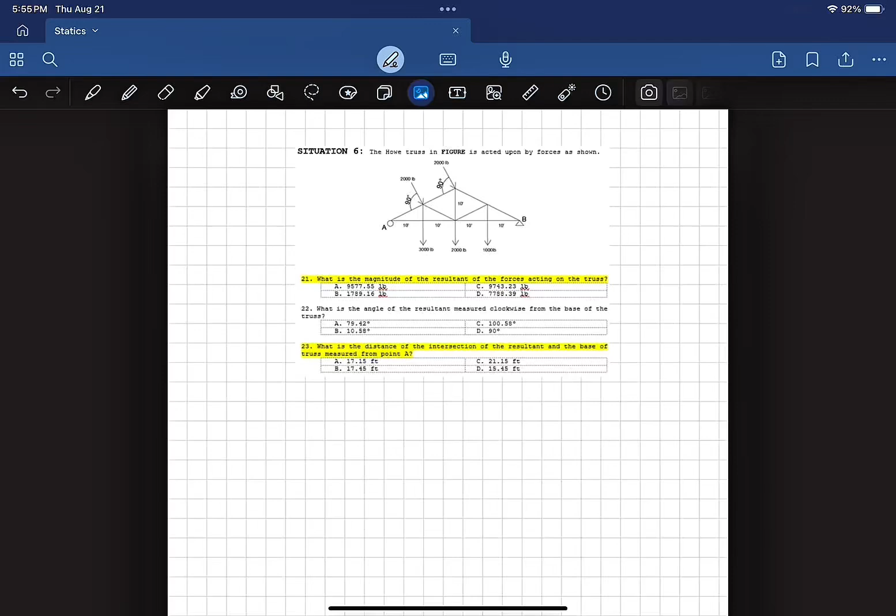Okay, ngayon naman guys, we're going to talk about this one. Okay, this item right here.

Tinitingnan kong mabuti kung saan possibly tayo nagkamali during the exam. Pero siguro isa rin - baka hindi tayo talaga nagkamali, baka hindi lang natin talaga siya sinimulang i-solve. Yun ang pinaka-isa sa nakikita ko ulit na point. Maybe yung iba napalabas ito, but for those na hindi, so makinig mabuti. Ulitin natin again, in order for us to analyze the problem.

Kailangan kasi ma-identify natin anong principle ba yung kailangan nating i-apply doon sa problem na isinosolve natin. Kung titingnan nyo mabuti, sinabi dyan: the Howe truss in figure is acted upon by forces as shown. Kung titingnan nyo, baka nakakita na inclined forces. Tingin ko lang, after nyo makita na merong inclined forces, tinigilan na, in-skip na. Yun naman, tingin ko lang. Hindi ko alam kung ano yung nangyari during your solving, bakit hindi siya napalabas. Pero yun, simulan natin i-solve.

So, what is the magnitude of the resultant of the forces acting on the truss? Ano daw ba? What is the magnitude of the resultant of the forces acting on the truss? By this word - resultant.

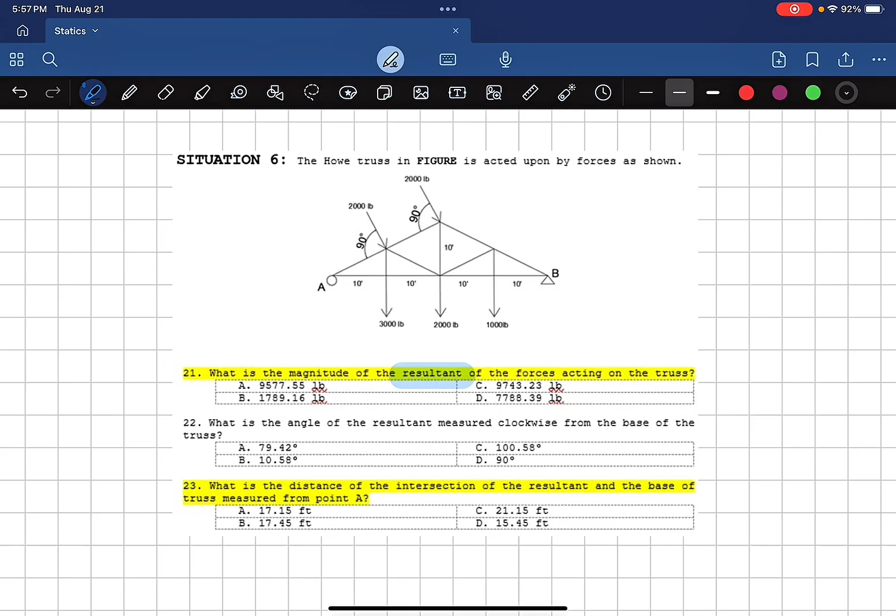Kung titingnan mo yung word na resultant na yan, diyan pa lang sinabi na kung ano ba kailangan mo. Basically, resultant - so if nag-resort ka sa summation forces vertical equals zero, summation forces horizontal equals zero, summation moment equals zero - pagka dito ka agad nagsimula, wala kang makukuha sagot dyan. Kasi hindi naman yun yung pinapahanap sa'yo. Ibig sabihin, ano yung kailangan mong gawin?

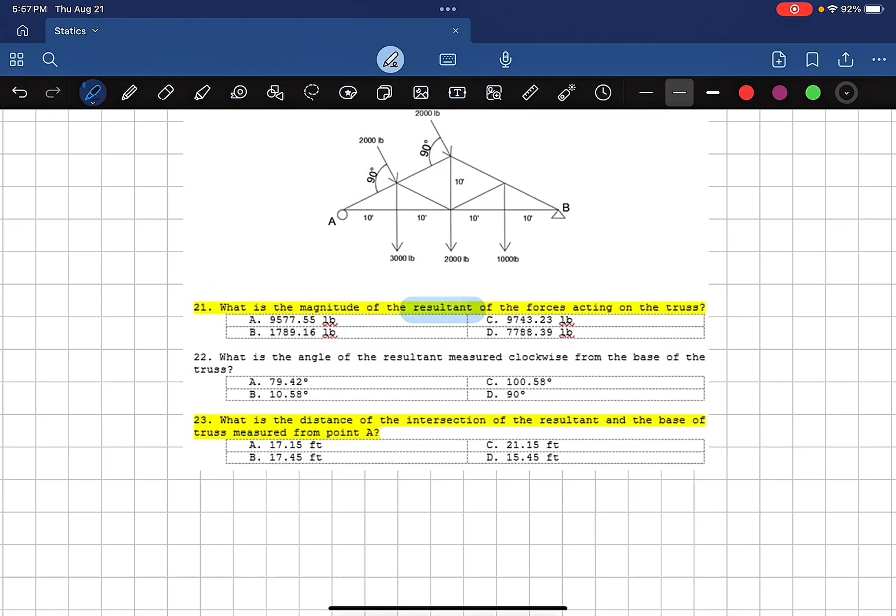If we're going to take the resultant, basically the resultant is the combined effect. Ang resultant natin is represented by a single vector line representing ng combined effect ng mga external forces na yan. So basically, yun lang yun.

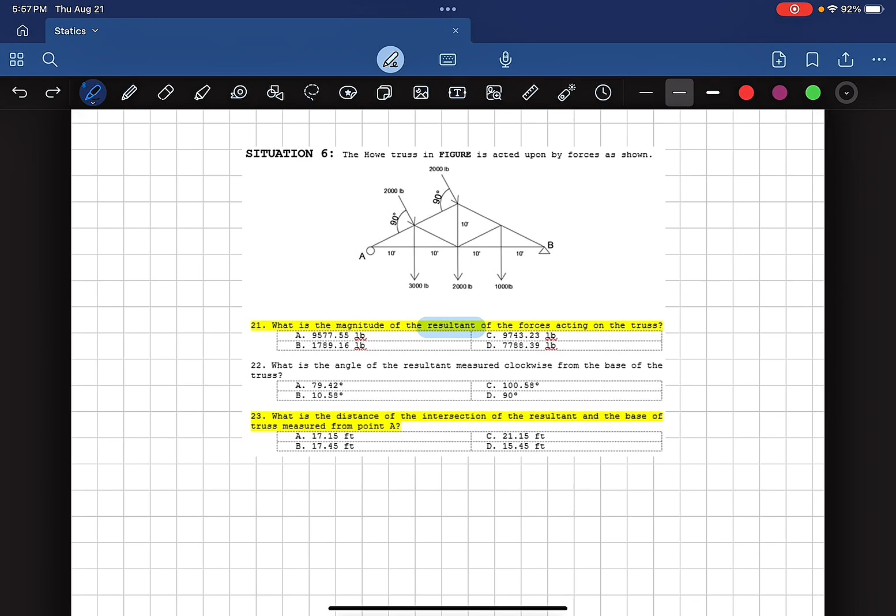Ngayon guys, kung titignan nyo mabuti, kailangan lang natin gawin is basically to determine the summation forces vertical, the summation forces horizontal. Ito kasi resultant natin vertically and this will be our resultant horizontally. To get the magnitude of the resultant, we get the RV square plus the RH square.

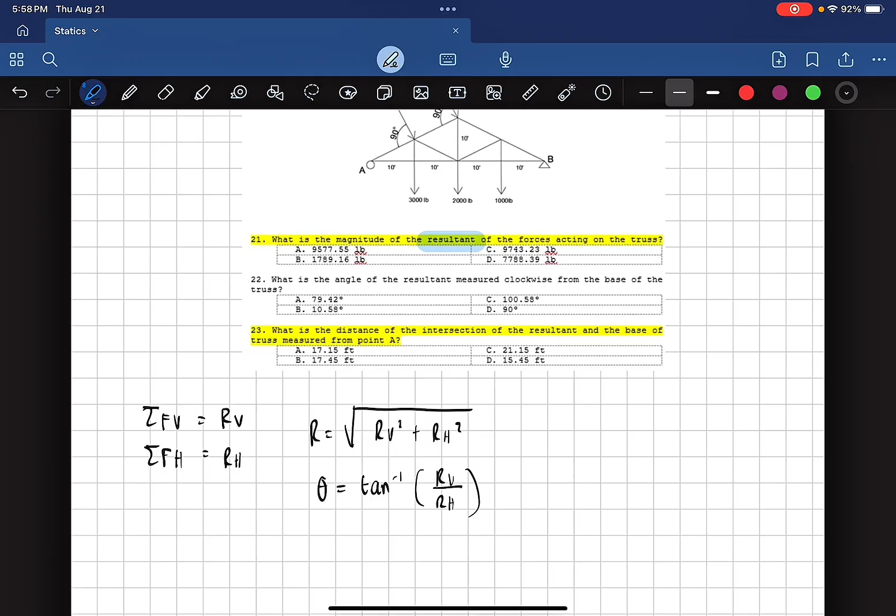At pag pinapahanap naman sa atin ito yung angle na yan - yung theta mo ay equals to arctangent ng RV over RH. For resultant principle, ito lang naman yung kailangan nating mga equations. Yan lang, ibig sabihin yan ka lang iikot.

Ngayon, siguro yung isa - alam mo, since na-identify mo na ganito, ganyan ang gagawin, ang tendency kasi siguro is nakakita ka ng inclined forces, so parang nawalan ka na ng pag-asa. Hindi ko alam, baka nawalan ka na ng pag-asa kung paano ba i-so-solve yung problem.

Kung ganun, I think ang best way guys ay to identify - if we're going to get the RV, syempre kunin mo muna yung mga components ng mga inclined forces mo. Paano yun? Di ba alam natin na ang inclined forces ay related sa mga angles natin.

Ibig sabihin, kapag nag-analyze tayo or identify ng components, mahalaga yung angle. So tama naman talaga na mahalaga yung angle. Sige, i-rewrite muna natin, dito na lang.

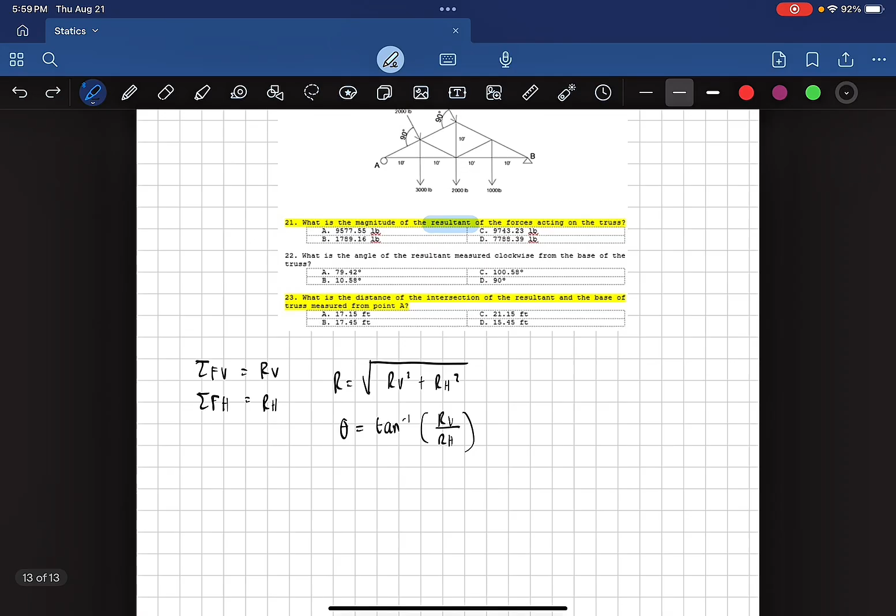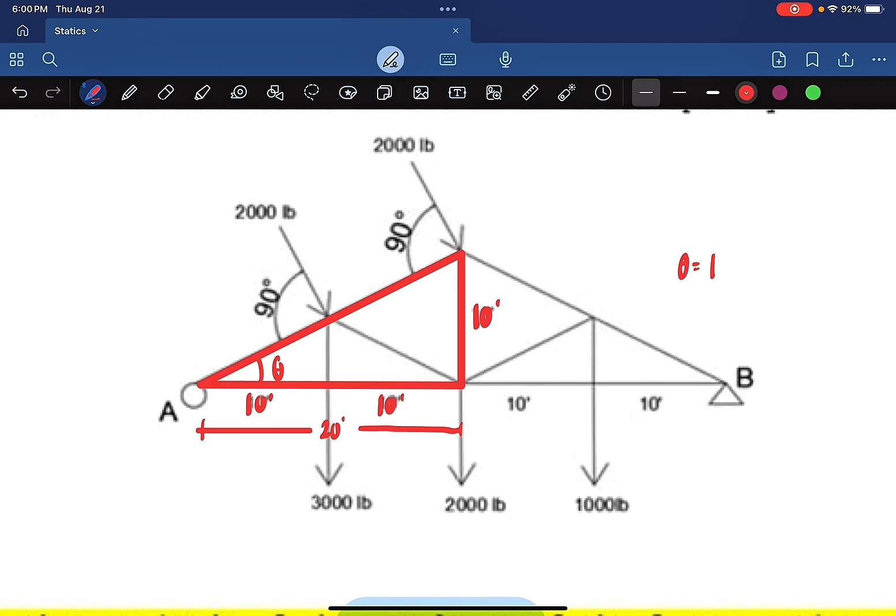Tingnan nyo muna, paano ba natin ma-i-analyze yung angle dito. Kung titingnan nyo mabuti, this is a right triangle - your right triangle have a height of 10 feet. At itong isa naman, kung titingnan mo, ang base niyan mula sa isang point papunta sa isa ay 20 feet. Kung titingnan mo mabuti, if we're going to get the angle at this point, simply, for your theta, equals arctangent ng opposite.

Ang opposite mo, if this is your theta, ang opposite side mo is this one, 10 over 20. Therefore, makukuha mo, your theta is equal to arctangent of 10 over 20. So, this is 26.57 degrees.

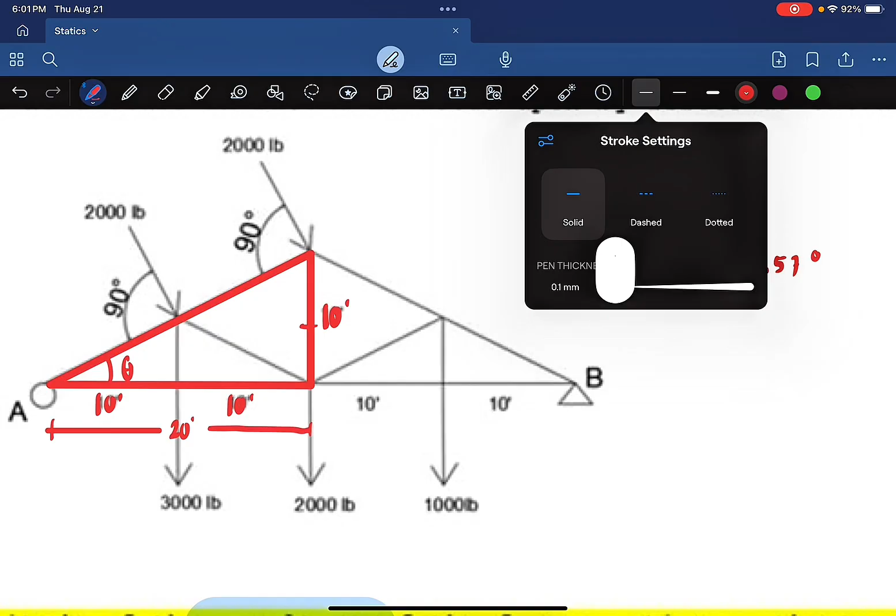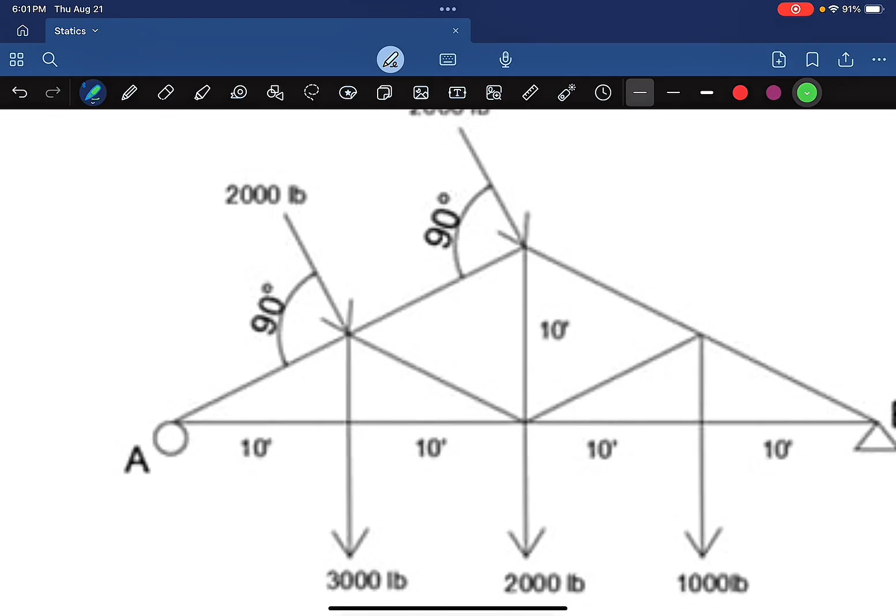Okay, so this is what? This is 26.57 degrees. Ngayon, kung titingnan mo naman mabuti, since nag-a-analyze nga tayo ng angles, this is 90 degrees, from dun sa plane natin.

Ngayon, yan ba yung gagamitin nating angle? Of course, hindi. If yun yung gagamitin nating angle, ang lalabas na component dyan is basically ganito lang, yung component natin pa ganyan. Kasi nga, along this plane tayo nag-analyze.

Eh, yan ba kailangan natin? Hindi. Ang kailangan natin is the component vertical, horizontal, along its plane. Kung ganun pala, ibig sabihin, ang angle na kailangan natin is and should be along the horizontal plane din. Kasi ang kailangan nating component is along straight, vertically, upward, at is along horizontal. Straight horizontal. Ibig sabihin pala, kailangan ng angle natin is with respect to the horizontal axis.

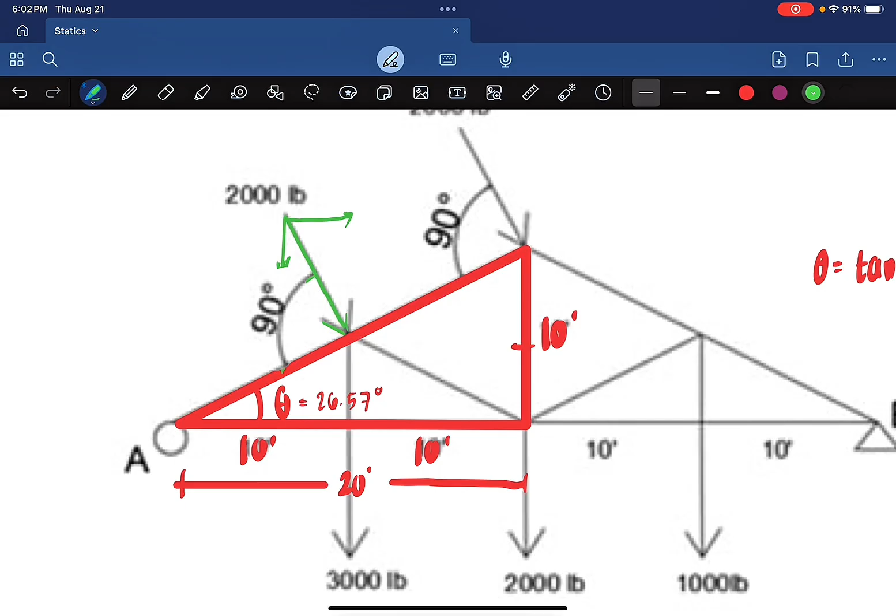Paano natin gagawin yon? So, pwede ba natin kunin? Okay, so didelete ko muna or ano ko muna yan. Pwede ba natin i-take ito? Okay, pwede ba ako mag-draw ng horizontal axis at this point? Ay, hindi ko na pwede. I'm sorry. So, pwede ba ako mag-draw ng horizontal axis at this point?

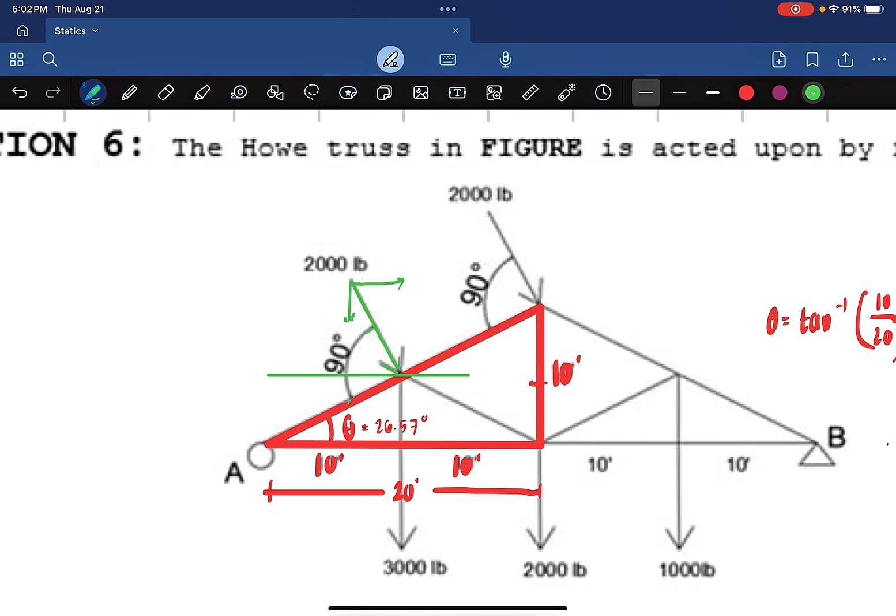Okay, and recalling the theorem or the concept of the corresponding angles, ganito yan guys. Ano ba yung sinatawag natin corresponding angles? At this is to recall lang for corresponding angles, knowing na mayroon kang dalawang parallel lines, okay. These are your parallel lines, and then, meron kang line intersecting both.

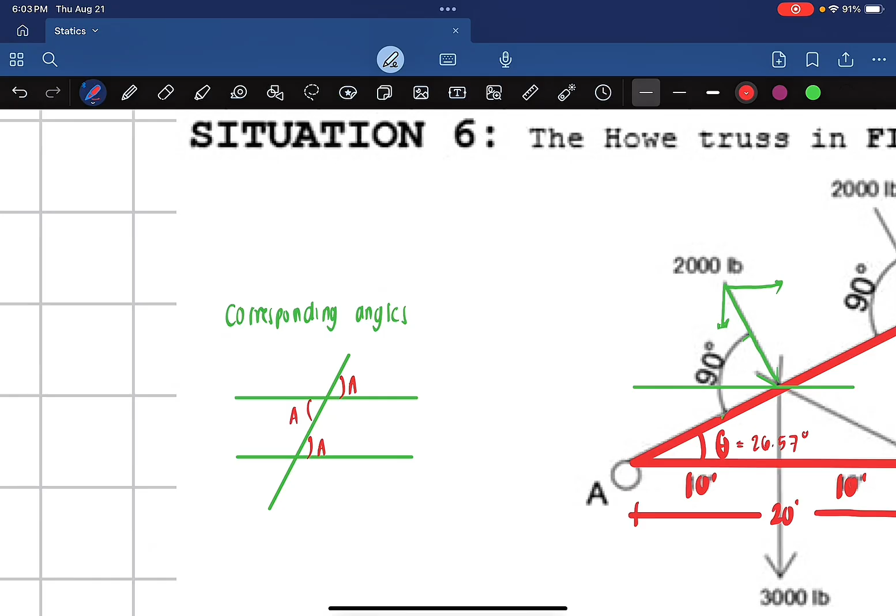Titingnan mo mabuti, this angle is equal to this angle. Tama? And this angle as well is equals to this angle. So, if in-name natin to as angle A, pwede na natin ito in-name as angle A and this also as angle A. Maliwanag? So, yun. This is just the recall para sa concept ng corresponding angles. Okay, hindi ko na alisin dyan. Sige, hayaan mo na.

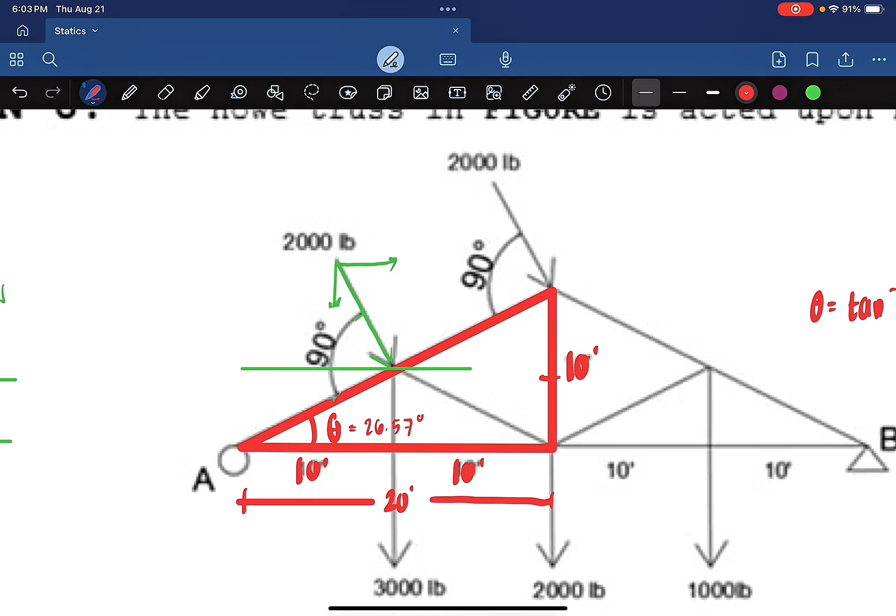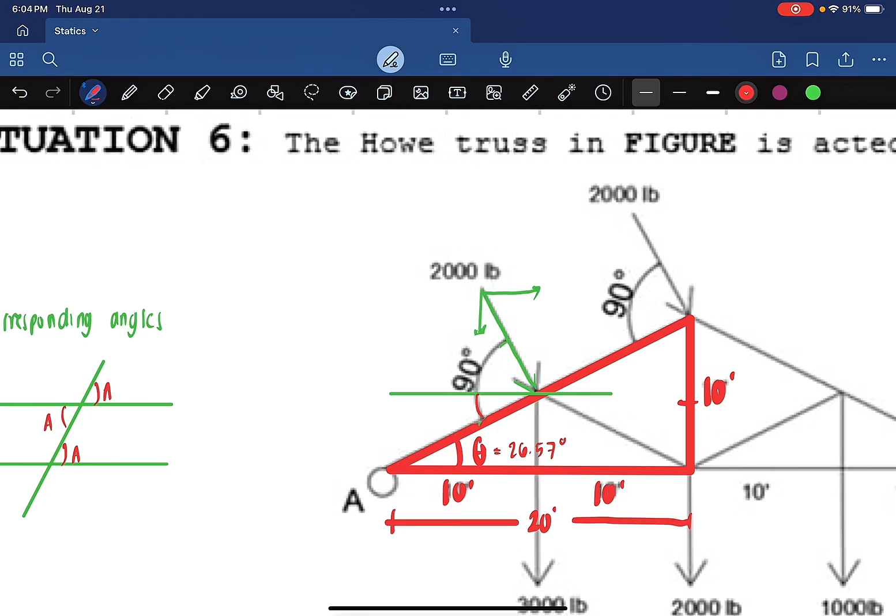So, ngayon, kung titingnan nyo mabuti, by recalling, if this is our angle, kung titingnan nyo yung sa may angle A na tinutukoy ko kanina dito, equal din siya dun sa may corresponding angle niya doon. So, ibig sabihin, pwede ko ba itong i-rewrite as theta 26.57 degrees as well. Kung ganun pala, if this is 26.57 degrees, knowing that this is 90 degrees, ilan na lang kailangan natin para makuha natin yung angle na ito, again, ito yung angle na kailangan natin. Yung with respect to the horizontal axis, para mapasingaw natin o mapalabas natin yung component na along vertical and along horizontal axis as well.

Kung 90 degrees, pwede ko bang sabihin that this will be 90 degrees minus 26.57 degrees? So, taking that, pwede ko ba siyang i-rewrite as 90 minus 26.57 equal to 63.43 degrees. Ibig sabihin, itong part na to, this part right here is equal to 63.43 degrees. Kung titingnan nyo mabuti, the forces na to, and then itong nasa taas is equal lang naman. So, kung titingnan nyo, pag nag-draw ako dito ng line, this is equal to 63.43 degrees. So, same thing.

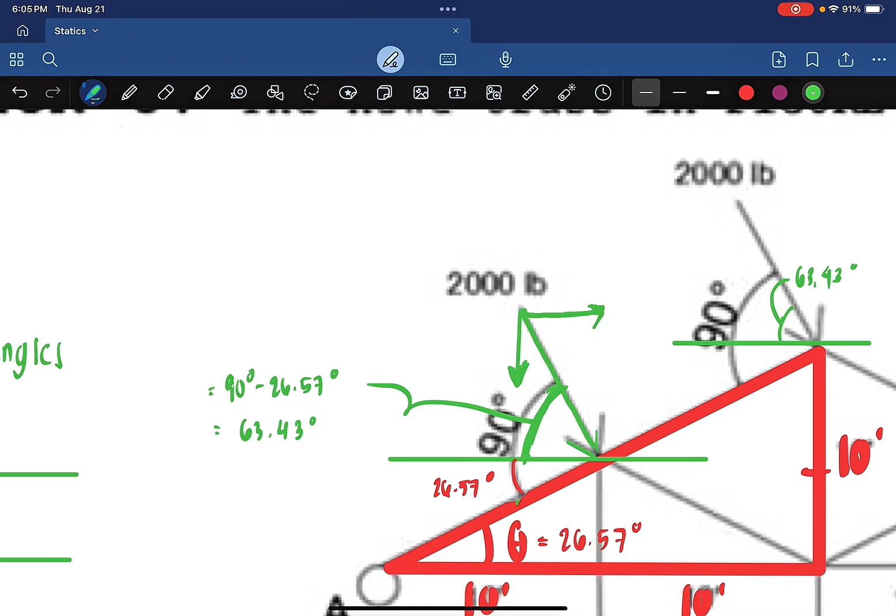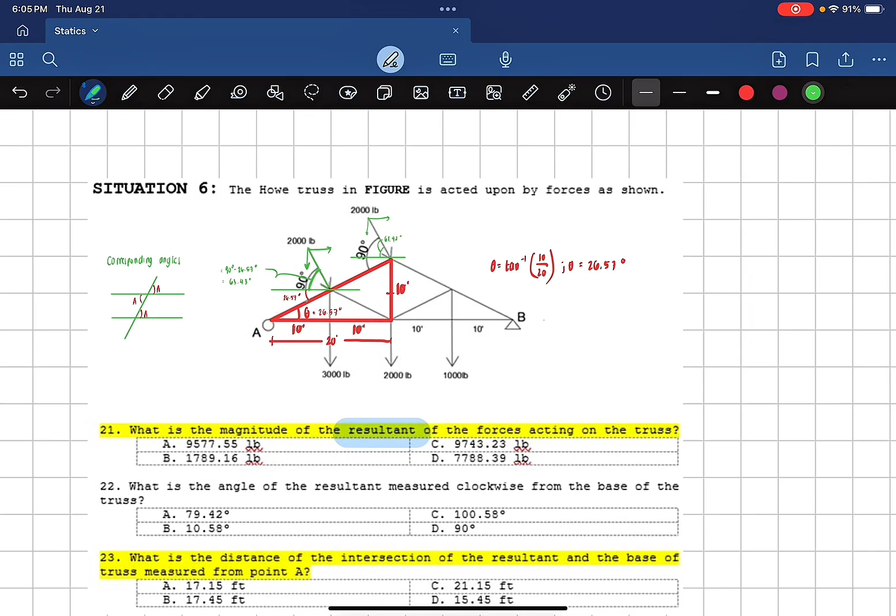Ayan. Okay. So, ayan yung magiging figure. Na-identify na natin guys kung ano ba yung angle natin. Wala na tayong magiging problema. So, pwede na ba tayo mag-take ng summation forces?

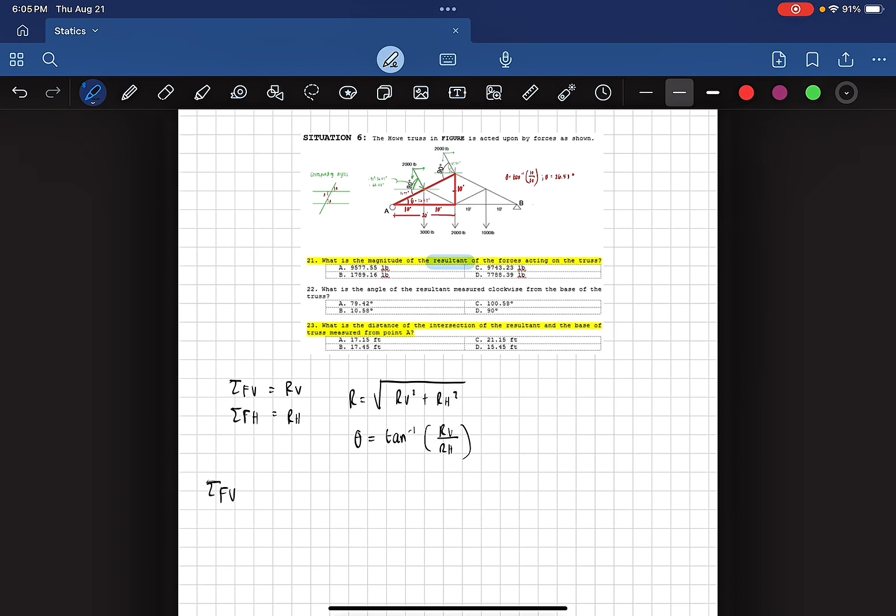So, pwede na. Taking the summation. Ano unahin natin? Sige, favorite nyo ng lahat. Summation forces vertical. Okay, again, this is not equal to 0 kasi ang concept natin is all about the resultant lang. So, summation forces vertical equals to RV natin. Therefore, RV is equal to lahat ng vertical muna, considering upward positive.

So, minus 3,000, minus 2,000, minus 1,000. And then the vertical component ng dalawa na to. So, minus 2,000 sine of 63.43 degrees, minus 2,000, isa pa, sine of 63.43 degrees. Kung titingnan nyo, bilangin natin yung force.

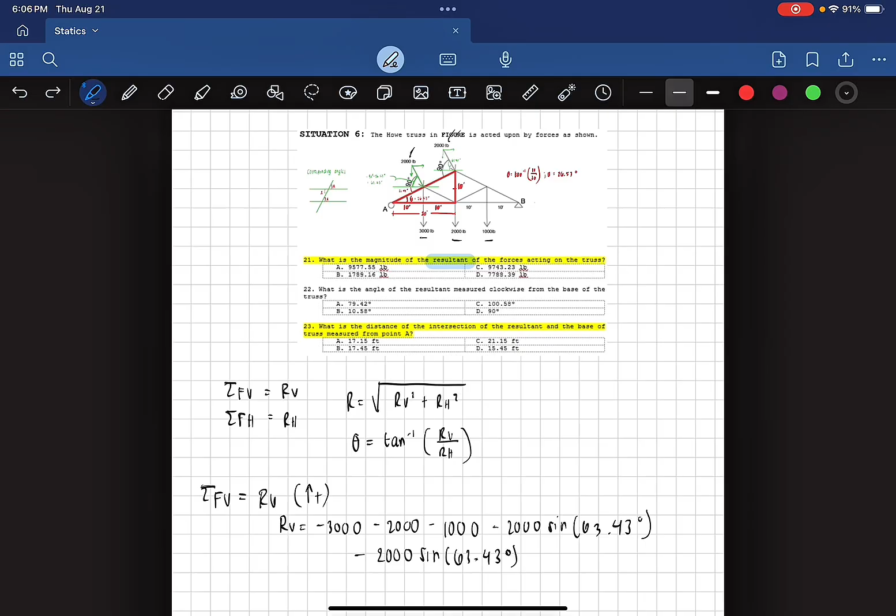So, 1, 2, 3, 4, 5. Kailangan 5 force yung mako-consider natin. So, okay, 1, 2, 3, 4, and then 5.

So, for RV, makukuha natin dyan is equal to, solve niyo, sa minus 3,000, minus 2,000, minus 1,000, minus 2,000 sine of 63.43. Actually, pwede mo ito i-multiply ng 2, but sige, sulat na natin. Minus 2,000 sine of 63.43 will get 9.5 or negative 9.5, negative 9.577, okay, 0.554 pounds, okay. So basically, ayan yung magiging RV natin.

Highlight ko muna, okay, but this is not our final answer yet, okay. Yan yung magiging RV natin.

Ngayon naman guys, how about the summation forces horizontal, is equals to Rx naman, tama? Considering rightward positive. Pwede ko bang sabihin that Rx, okay, so sorry. Gawin nating RH, baka mali to. So, RH, okay?

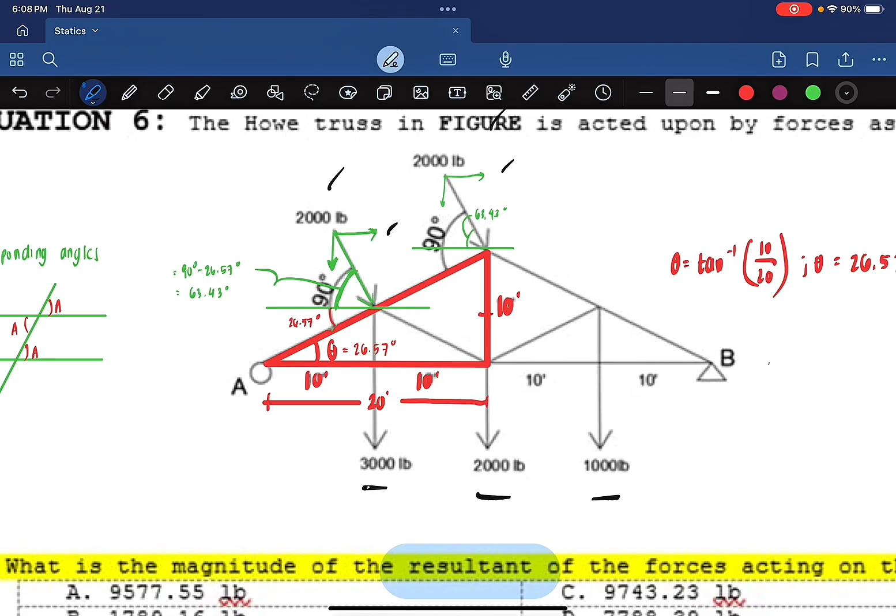Masyadong inconsistent yung nagagamit natin. Anyway, RH. Kung titingnan niyo mabuti, meron ba tayong other external horizontal component aside from this one, aside from horizontal component of the two? So, wala. So, basically, ang RH natin is simply 2,000 cosine of 63.43 degrees plus 2,000 cosine ng 63.43 degrees.

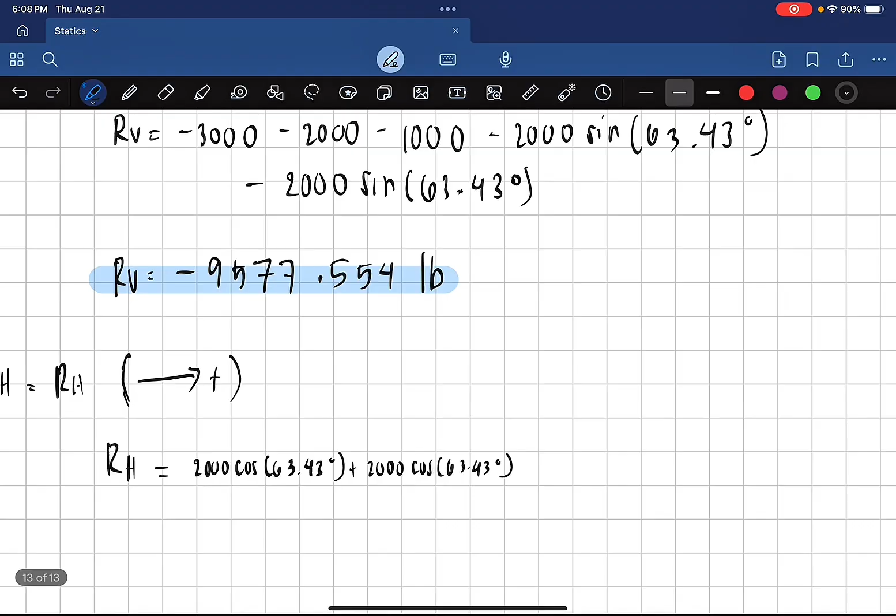Teka lang. Balikan pala natin, bakit ba, o paano ko ba napagdesisyonan na ito yung magiging direction of force nila. Ang ino-note ko lang dito, okay? Establish coordinate axis on the tail, okay, of the force, okay. For example, this is your force, okay.

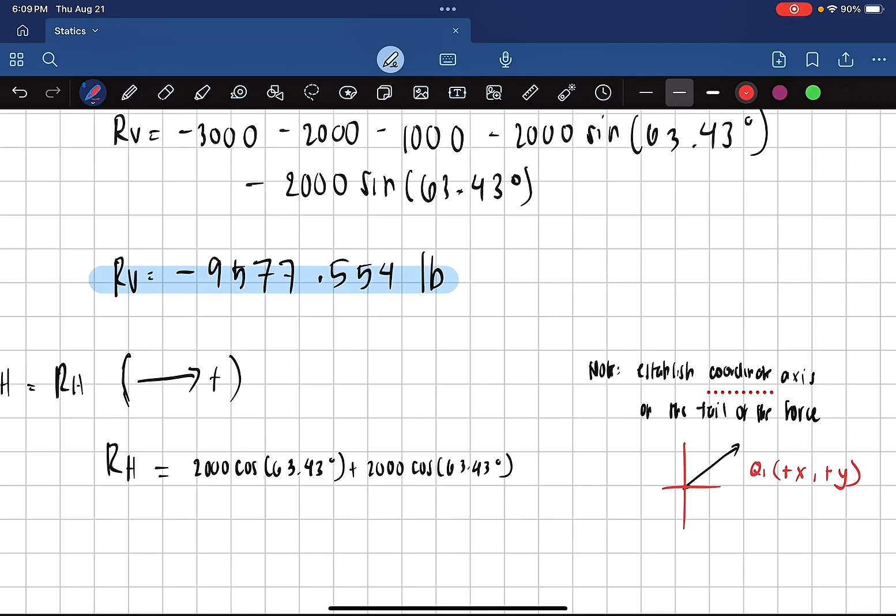Nag-establish ka ngayon ng coordinate axis, at kapag nag-establish ka ng coordinate axis, malalaman mo saan siyang quadrant. If Q1 ka, meron kang positive na x at positive na y. Kung titingnan mo, andito ka, therefore yung magiging fx mo is positive, okay. Yung fy mo is also positive. Kung titingnan niyo mabuti, okay, yung force natin doon, okay, this is only an example, okay.

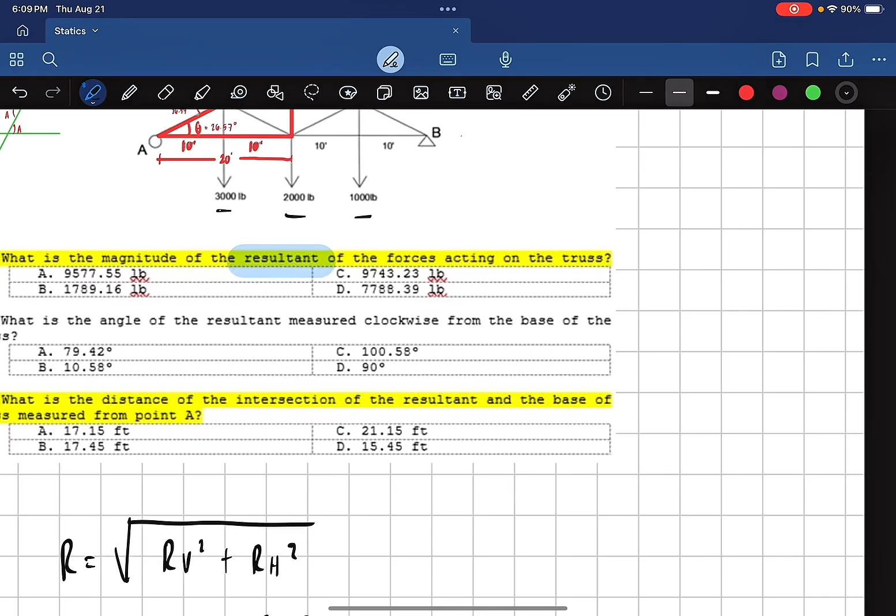So yung 2,000, kung titingnan niyo mabuti, wait lang, ano ba? Saan ba pwede ilagay? Sa taas na lang, okay, dito na lang. Lagyan natin ng sense, okay, lagyan natin ng sense. Ngayon, kung titingnan niyo mabuti, yung 2,000 pound natin is acting pa ganyan, di ba? 2,000 pounds. So, kapag nag-establish ka, teka lang, ayusin ko lang yung arrow, okay?

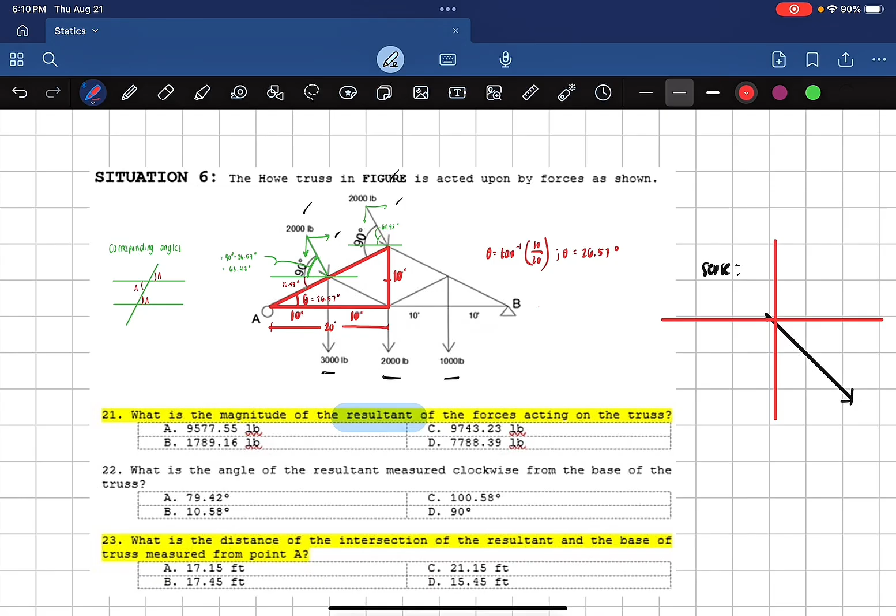So, kapag nag-establish ka ng coordinate axis mo, okay? Yan. So, kapag nag-establish ka ng coordinate axis, ang pangit, ulitin ko. Baka sabihin niyo hindi, may iPad na nga, hindi pa inaayos. Joke lang. So, for example, eto yung tail mo. Ibig sabihin, di ba sabi ko is mag-establish ka ng coordinate axis sa tail mo, okay? By the way guys, etong sinusulat ko na to para lang sa idea niyo. Ito yon yung 2,000 pound, okay? Ito yun, ito, this point.

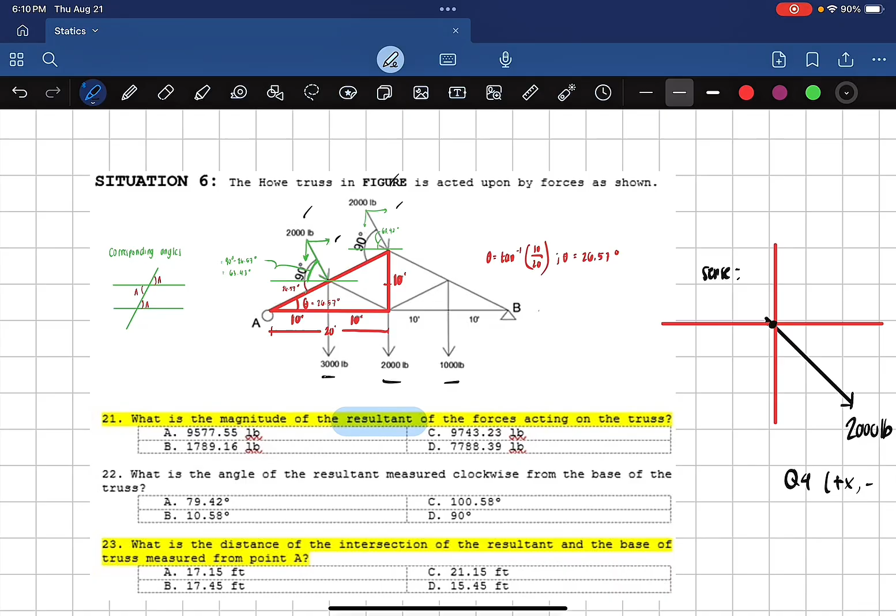Okay? Now, kung titingnan niyo, nag-establish tayo ng coordinate axis dyan, consider mo yan as quadrant 4, di ba? Wherein yung x mo is positive and then yung y mo is negative. Okay? Kung titingnan niyo, yung mga nakuha natin kanina, yung RV natin is negative. Okay? Therefore, talagang pababa siya. Okay? Which is

9577.554 downward. Okay? At para naman dito, kasi hindi pa natin susolve, RH is equal to 2,000 cosine of 63.43 plus 2,000 cosine 63.43 din. Ano tayong 17, tama ba?

1789.16. So, 1789.16 pounds. So, highlight natin yan.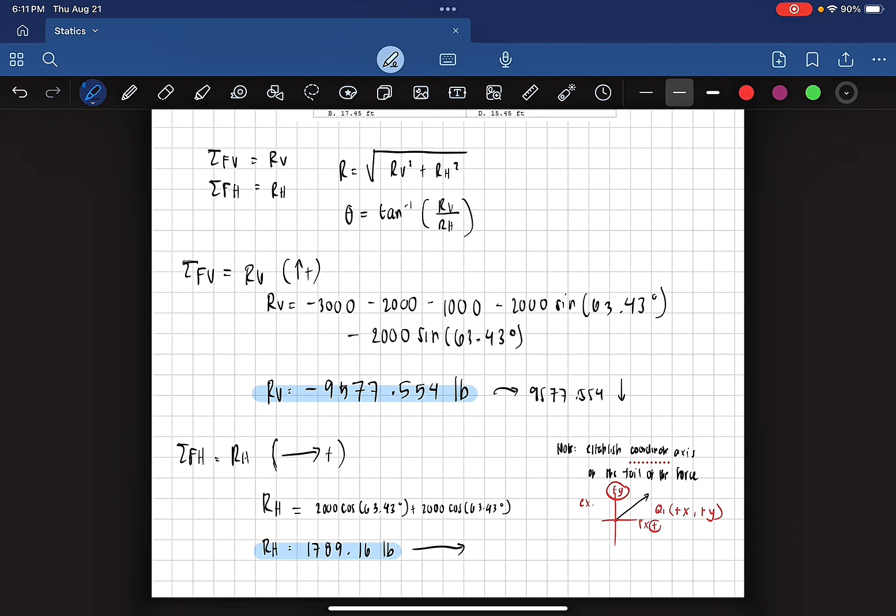Kung titingnan mo, yung direction natin dyan is basically papunta dun. Di ba? Ibig sabihin, na-satisfy ba natin yung sense nung force natin? So, basically, tama. So, hindi natin kailangan i-assume yun. Di ba? So, this is downward. I don't know if yung word na rightward is nag-exist, but sige, lagyan na natin rightward.

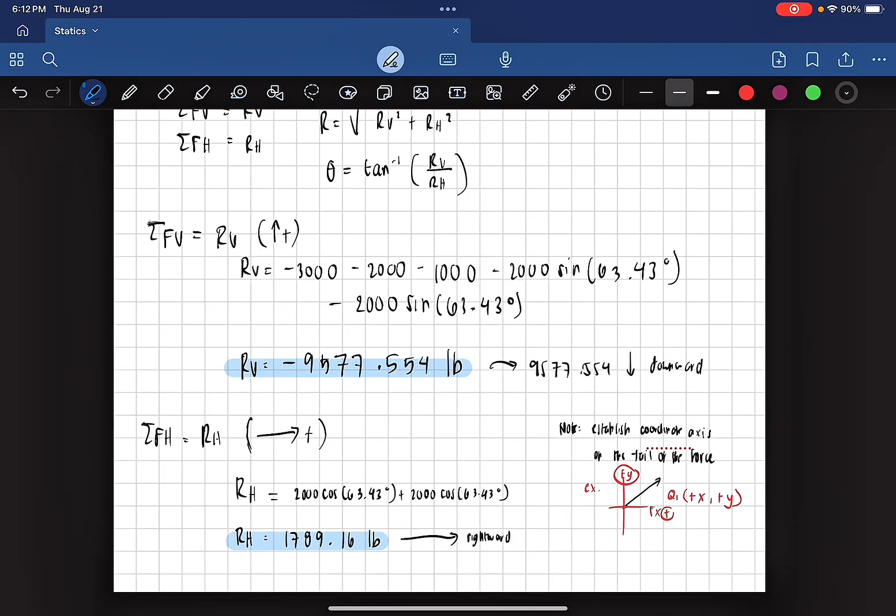Okay. So, yun. So, ibig sabihin, nakakuha na tayo ng components. Nakakuha na tayo ng mga components natin. So, mabalik tayo guys. Nire-write ko lang dito basically yung component natin for vertical and horizontal components nung horizontal and vertical component ng resultant natin.

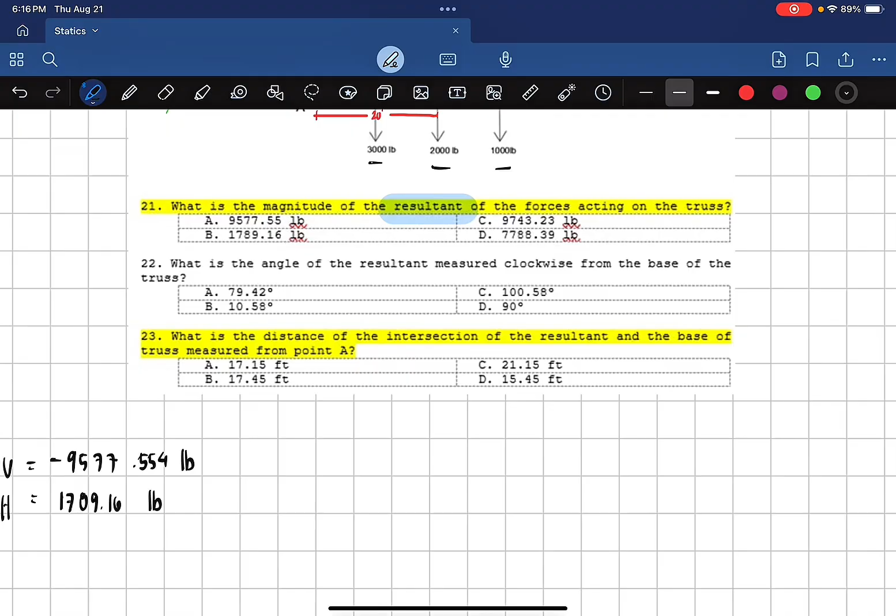Okay, so hindi pa yun yung sagot guys. So, huwag yung pagka lumitaw yan guys at ayan, Diyos ko. Kung lumitaw pala yan, makikita niyo yan guys. So, what is the magnitude of the resultant of forces?

Kung titingnan niyo lumitaw, excited ka, sige bilog. Okay, nakita mo rin 1789, sige ulit bilog ulit. Okay, pero yan na ba yung sagot kasi? Hindi, tingin ko ganun yung nangyari. Okay, okay pala desisyon. Okay, hindi porkit lumabas. Okay, hindi porkit lumabas yung mga naunang sagot niyo dun sa may choices, bibilugan niyo na agad.

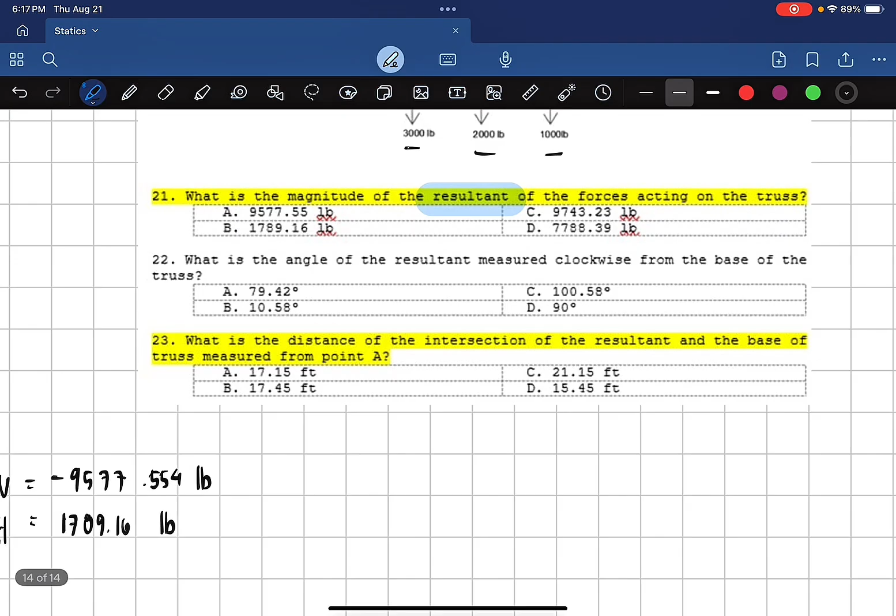Okay, baka akala niyo tama yung pinaggagawa natin. So hindi ganun guys, okay, laging dapat kayo may trust issue. Yun ang mahalagang ma-develop - trust issue. Pagdating sa engineering, kapag may trust issue ka, mas okay, kasi mas double check mo lagi kung tama pa ba pinaggagawa mo. Kung wala ka palang trust issue, naniwala ka agad na ito na yung nakuha mong sagot, so mali na. Ibig sabihin, hindi pa yun yung kailangan nating sagot.

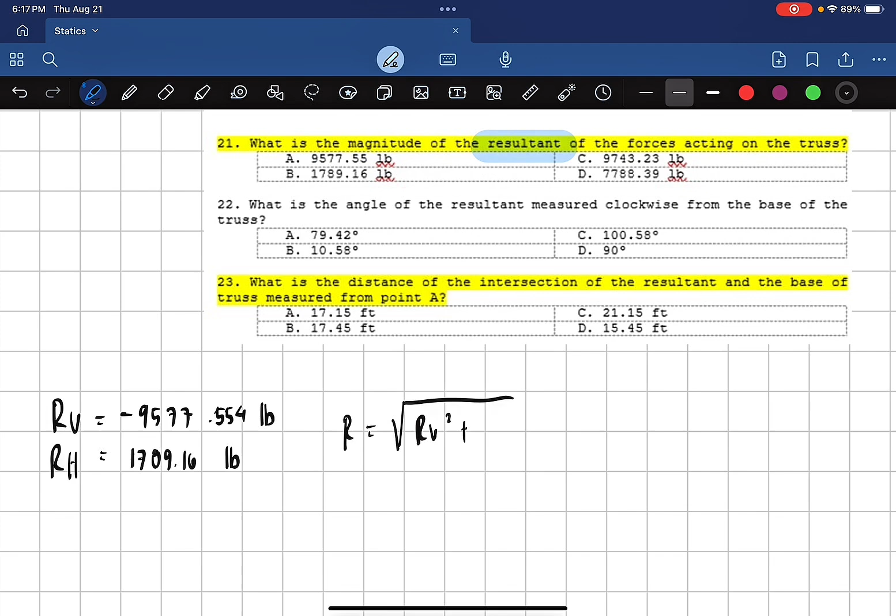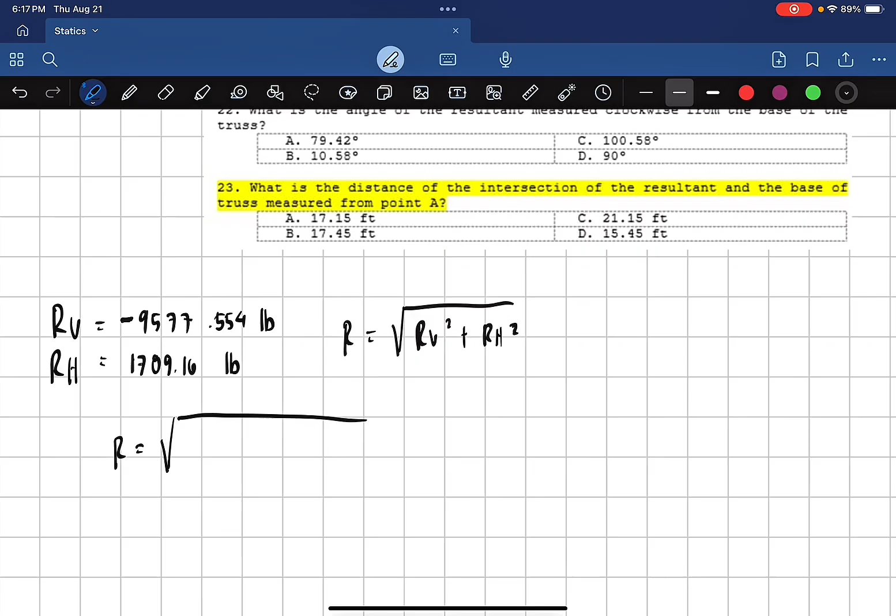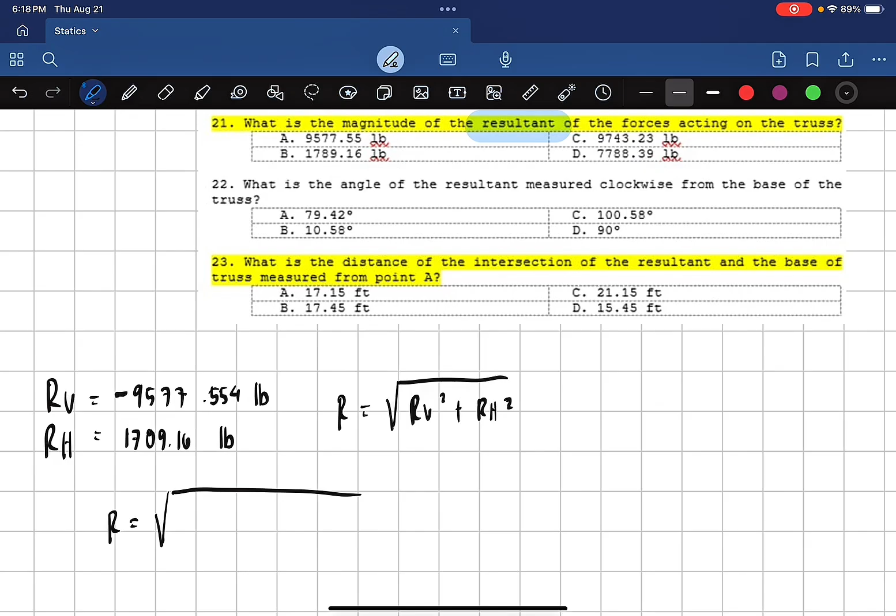The resultant is equal to the RV square plus RH square. Okay, yan ang kailangan. So by getting that, ang resultant natin is equal to - by the way guys, in-include ko tong sign na to kasi, bakit? Kung titingnan nyo yung for item number 22 natin, hinahanap is yung angle. Kapag kumukuha kayo guys ng angle, always include the sign of the component, kasi yun nga yung nag-establish yung direction kung nasaan ang quadrant ba siya.

Mamaya ipoprove natin yan. Anyway, so if yung RV natin is equal to negative 9577.554, pwede ko ba siyang i-rewrite as 9577.554 square, okay, kasi pag in-square mo na may negative, magiging positive pa rin naman yan. Plus 1789.16 square. Taking that, ang resultant natin will be square root of negative 9577.554 square plus 1789.16 square. Kung yan, ano yun? Ano makukuha na sagot? So 9743.23 pounds - eto pala ngayon yung bibilugan mong sagot.

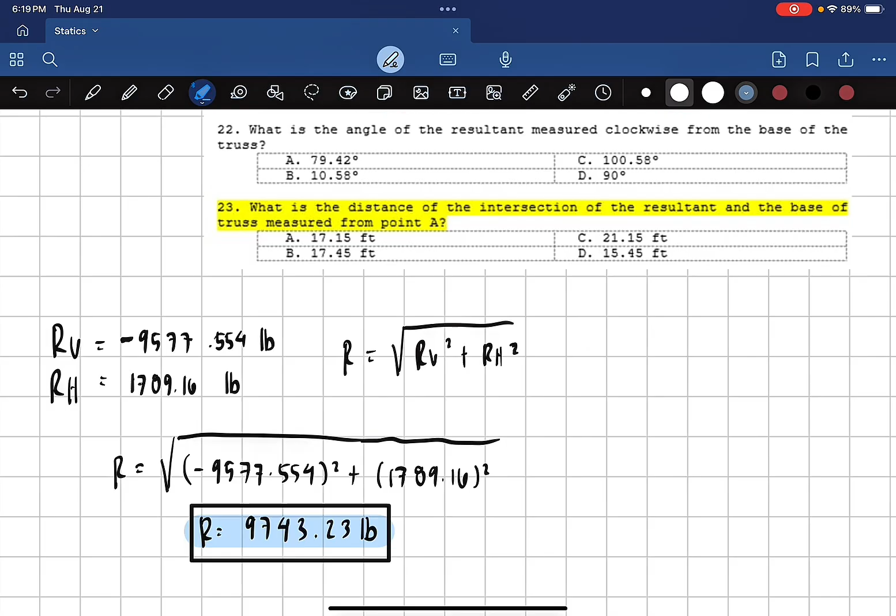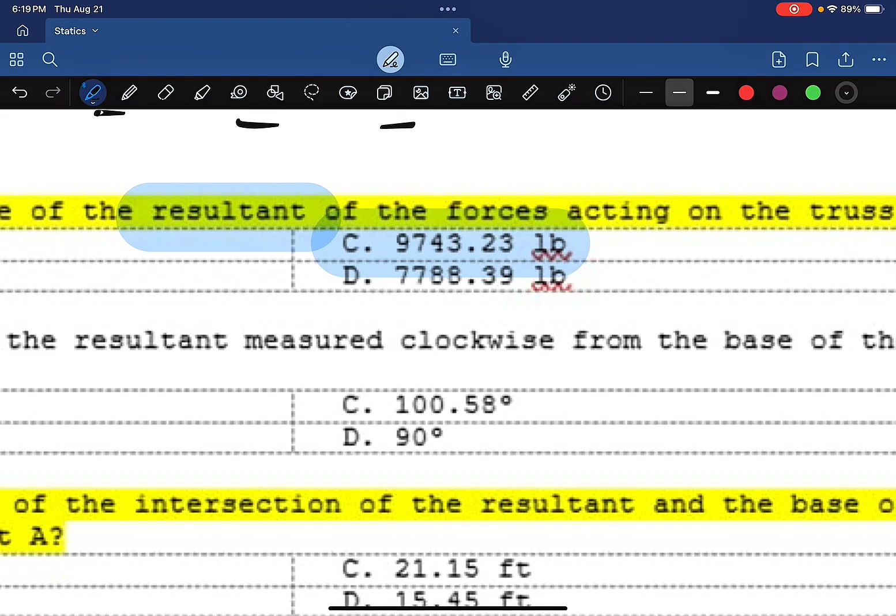Okay, kung nagmamadali, kailangan magkaroon ka ng trust issue. Yun ang kailangan mong i-develop. So kung bad thing yun para sa ibang mga bagay, dito sa engineering, hindi masamang magkaroon ng trust issue. Okay, so ito yung magiging sagot natin for this item.

Ngayon guys, okay na. Ang hinahanap natin for item number 22 is simply ang angle. So ang theta angle natin is equal lang sa arctangent ng RV over RH. Ito medyo may idea naman ako dito. Arctangent, again include nyo yung negative sign. Negative 9577.554, okay, over 1789.16.

Ang arctangent natin will be negative 9577.554 over 1789.16. Ang makukuha natin dyan, ang theta is equal to negative 79.42 degrees. Okay, kung titignan nyo, ayan na.

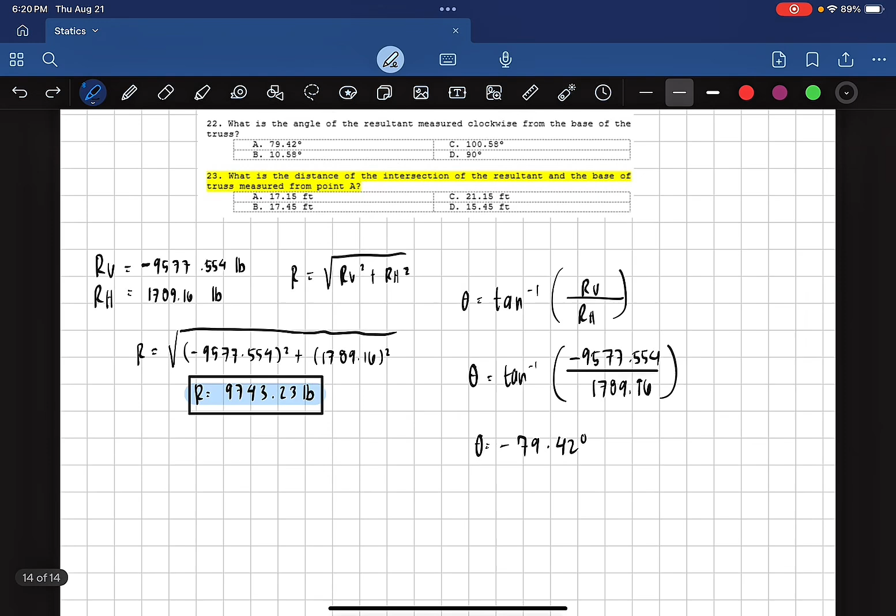What is the angle of the resultant measured clockwise from the base of the truss? Yung negative 79.42, paano ka bumilang ng angle dito sa coordinate plane, o coordinate axis? Ngayon guys, ang angle mo, bibilangin mo siya positive counterclockwise, at bibilangin mo siya negative pag clockwise. Since negative nakuha natin, paano mo siya bibilangin? From your positive x-axis, bibilang ka papunta dito. Okay, baguhin natin ng kulay para magamit natin. So ibig sabihin, from positive x-axis, iikot ka ng negative 79.42. Since negative nga, ibig sabihin, ang magiging bilang mo is clockwise. So dito yan papunta. Ibig sabihin, yung angle mo mula doon papunta doon.

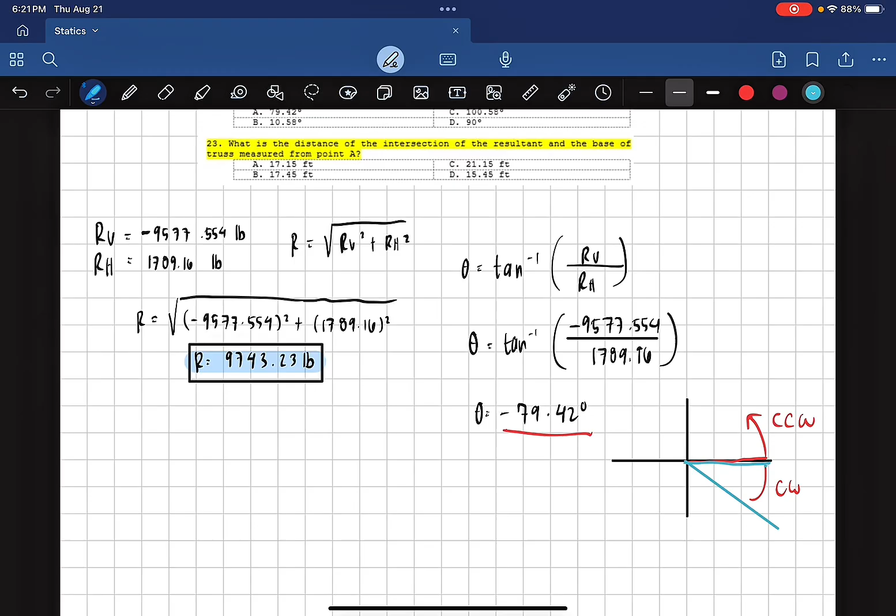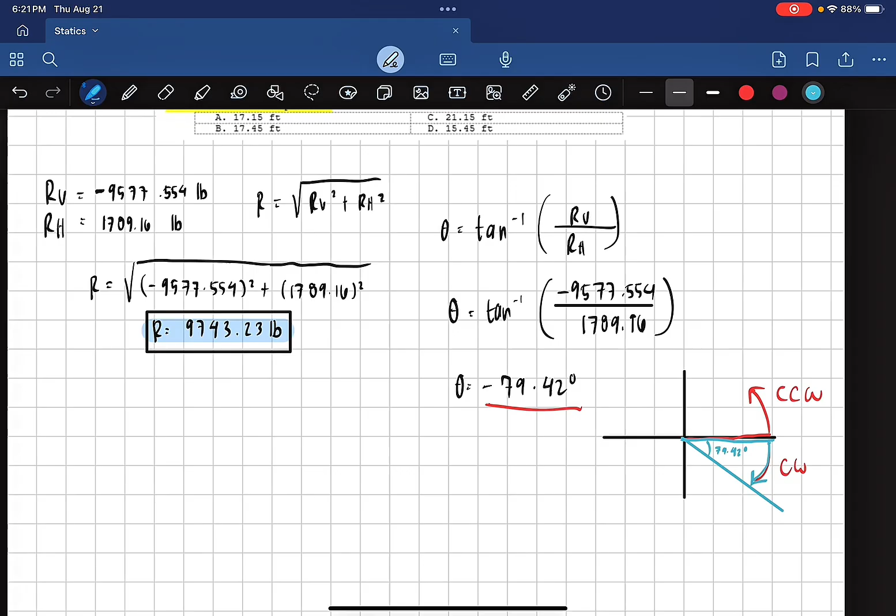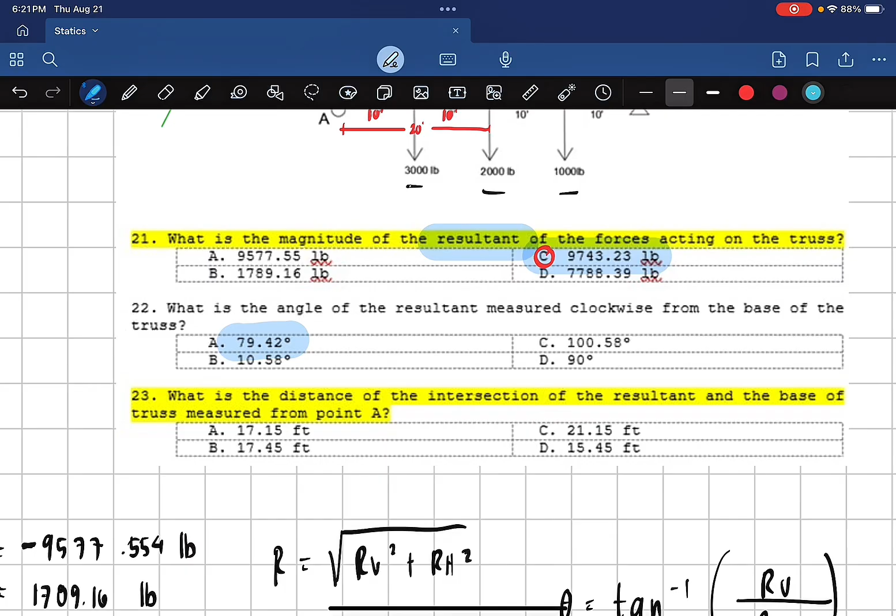Okay, so ito ngayon yung magiging 79.42 degrees natin, measured clockwise, sinabi na yun. Ibig sabihin, ganun, tama. Nakuha natin sagot. So kung ganun pala, pwede ko na ito ulit i-highlight. Malapit na tayo matapos.

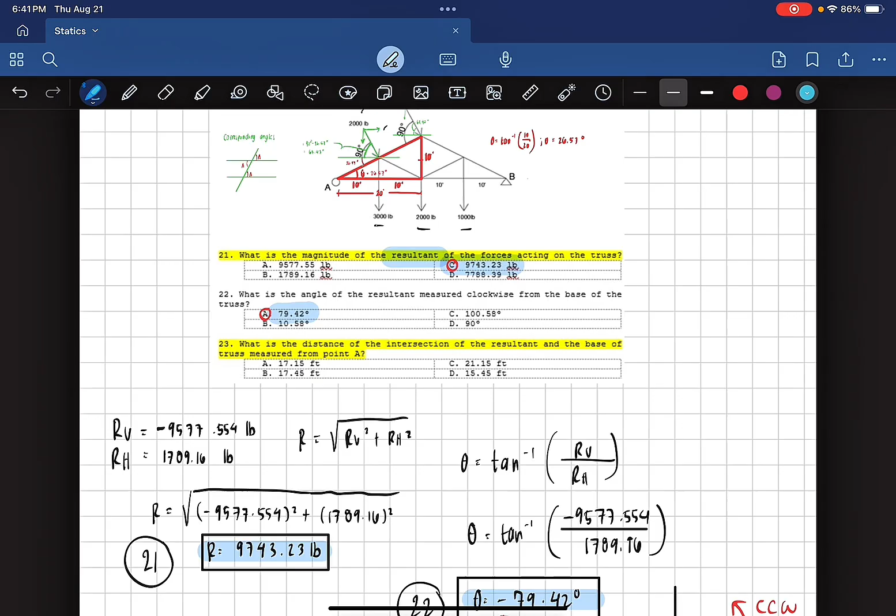So yun, okay na. So guys, ang next naman na hinahanap sa atin is for number 23: ano ang distance ng intersection ng resultant at ng base ng truss, measured from point A. Kung titignan nyo mabuti, ito lang, nire-rewrite ko lang to.

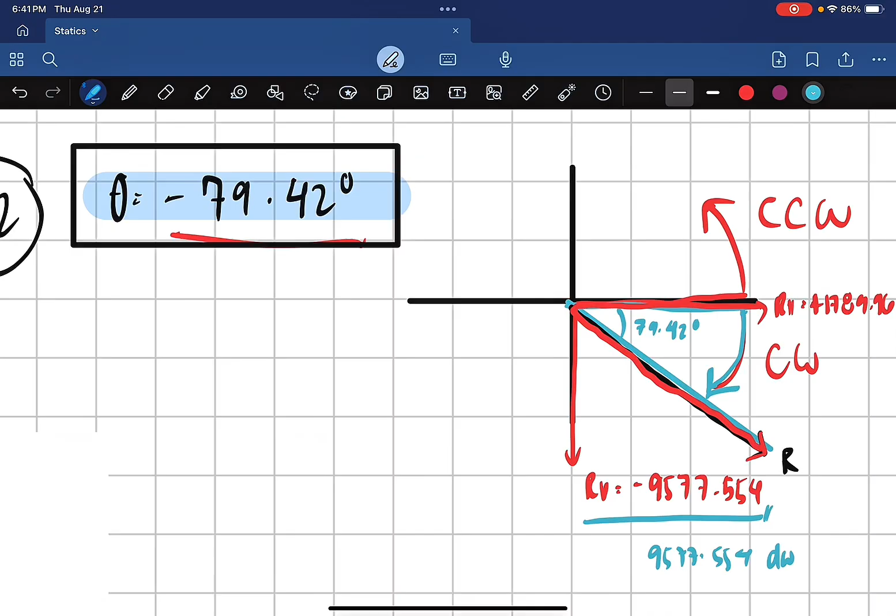Knowing na yung vertical reaction natin is - knowing that this is our resultant - again, yung RV natin is negative, meaning pababa nga siya. So pag nire-write mo naman na siya, pwede mo na siyang i-write as 9577.554 downward, at maalis na yung negative, basta magnitude na lang siya. At for horizontal naman is 1789.96 to the right naman siya. Okay, ngayon, paano ba yan nag-act?

Kung titingnan yung mabuti, the resultant force is the combined force of all the forces given in the system. At kung mapapansin nyo, na i-translate natin siya into one single component acting 79.42 degrees from the positive x-axis measured clockwise. Kung titingnan nyo mabuti, saan pa siya mag-a-act? Is it pa ganito?

Okay, based sa angle na nakuha natin, is it pa ganito ba? Knowing na negative at mag-negative siya. Di ba hindi? Kasi ang kailangan natin masatisfy is what? At least nasa quadrant 4 siya. If you're going to take coordinate axis here, sa tail niya, ang tendency niyan is nasa Q3 siya, pag ganyan.

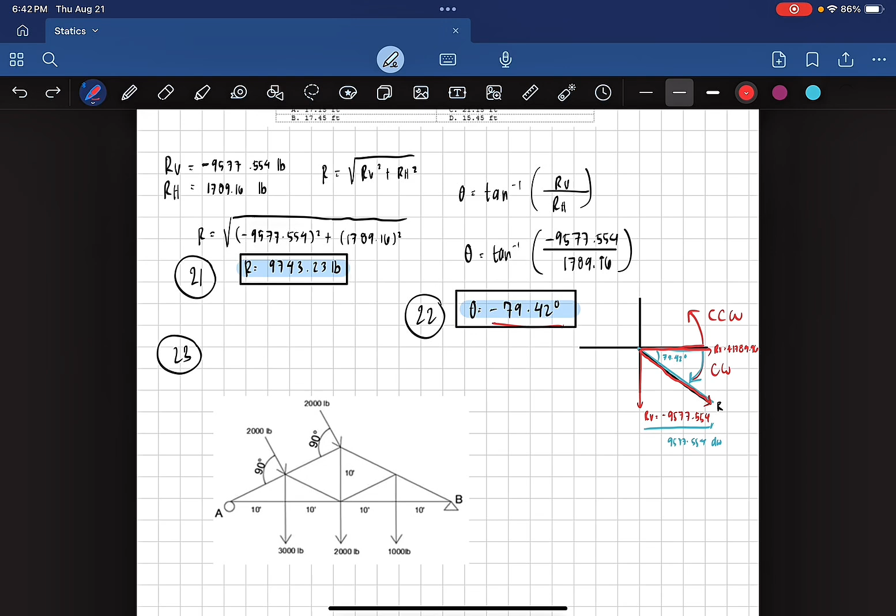By common sense na lang din, tingnan niyo mabuti. Diyan ba mag-a-act yung pinakamalakas na magnitude ng force natin, knowing na nasa kaliwa yung mga external forces? So hindi, syempre dito yan, along horizontal, dito rin sa may part na yun.

So pwede ko ba siyang i-write as ganito. Yung resultant natin is R is equals to, ang magnitude na resultant natin is 9,743.23 pounds.

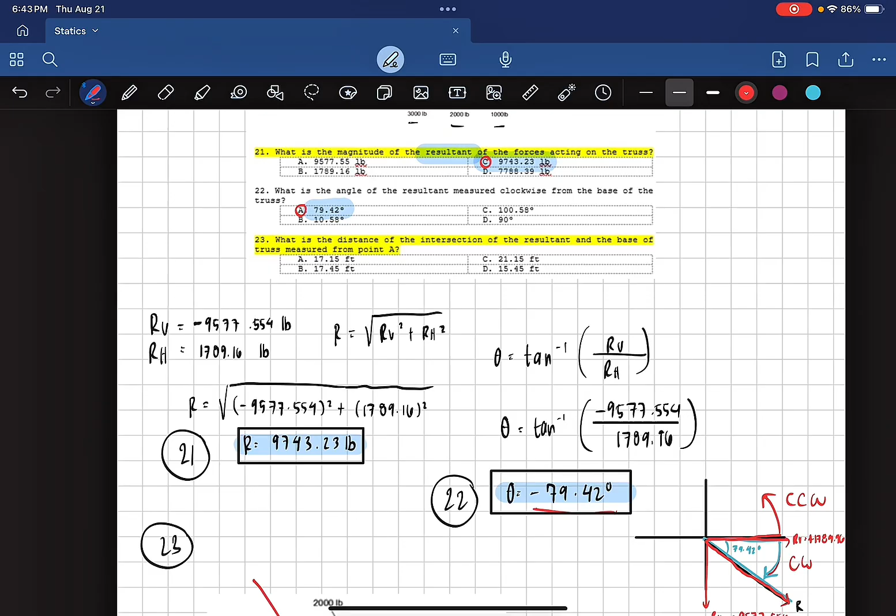Okay guys, ano ba hinahanap? Ang sabi sa atin sa problem, what is the distance of the intersection of the resultant and the base of the truss? Ang base of the truss natin is this, this lower chord. So top chord and then bottom chord. So ito yung base na tinatawag sa atin.

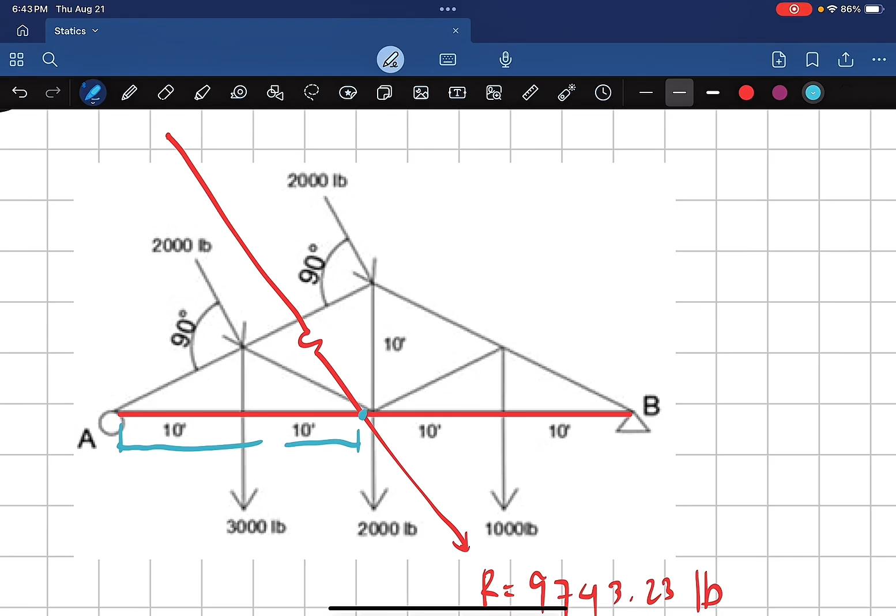Saan daw, at point dito, saan daw siya nag-act? So ito guys, hindi yan accurate, assumption ko lang na ganyan itsura niya. Anyway, kung saan daw siya nag-act na diyan, i-denote lang natin as D. So basically, yung hinahanap sa atin ay the intersection of the resultant and the base of the truss.

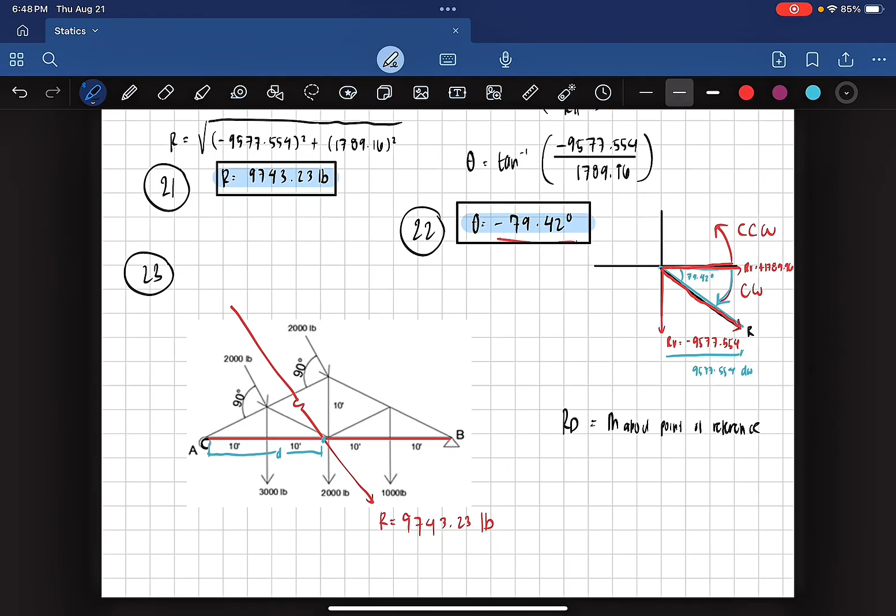So to continue, di ba dati kumukuha tayo ng location ng resultant natin, basically RD is equals to moment about point of reference. Di ba sinabi na hanapin natin doon yung distance nung resultant natin or the distance of the intersection natin from point A. Therefore, ang reference natin diyan is point A, yan yung point na kinoconsider natin.

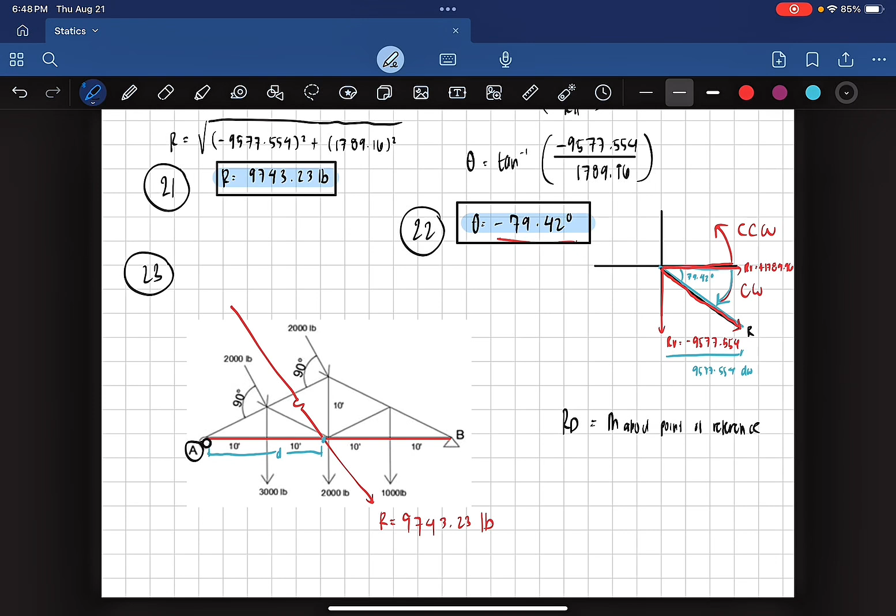Okay, so kung ganun pala, wait lang, kinopya ko lang muna dito sa new page natin. So guys, ibig sabihin pala, if ganun yung gagawin natin, kailangan muna natin kunin, lahat ng moment about point A.

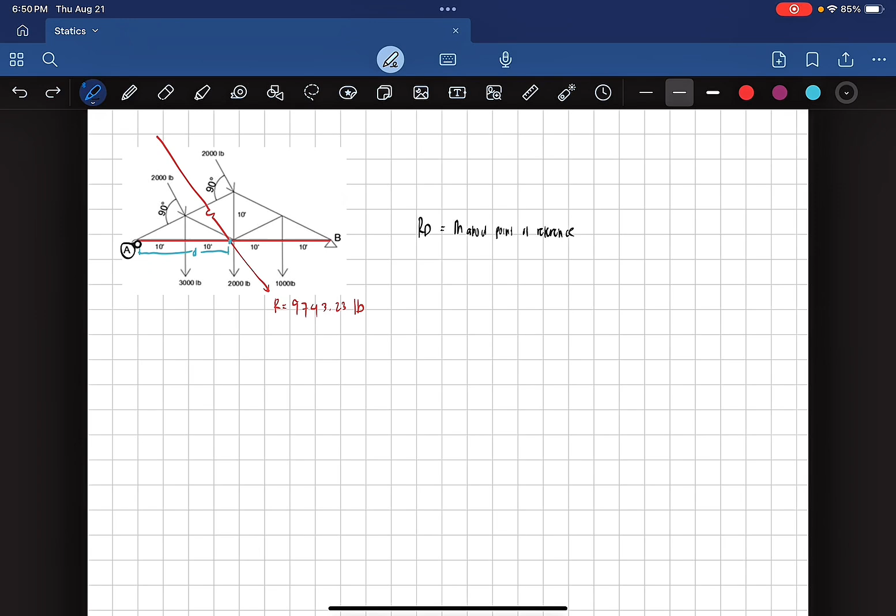Ibig sabihin, ano ba yung mga moment effect nitong force ng 3,000 pound, 2,000 pound, 1,000 pound acting vertically straight, at itong 2,000, and then another 2,000 pound acting with an inclination of 90 degrees from the truss. Kung titingnan natin if we're going to get the moment, syempre 3,000 times the perpendicular distance 10, 2,000 times the perpendicular distance 20, and then 1,000 perpendicular distance of 30. Ito yung 10, 10, 10.

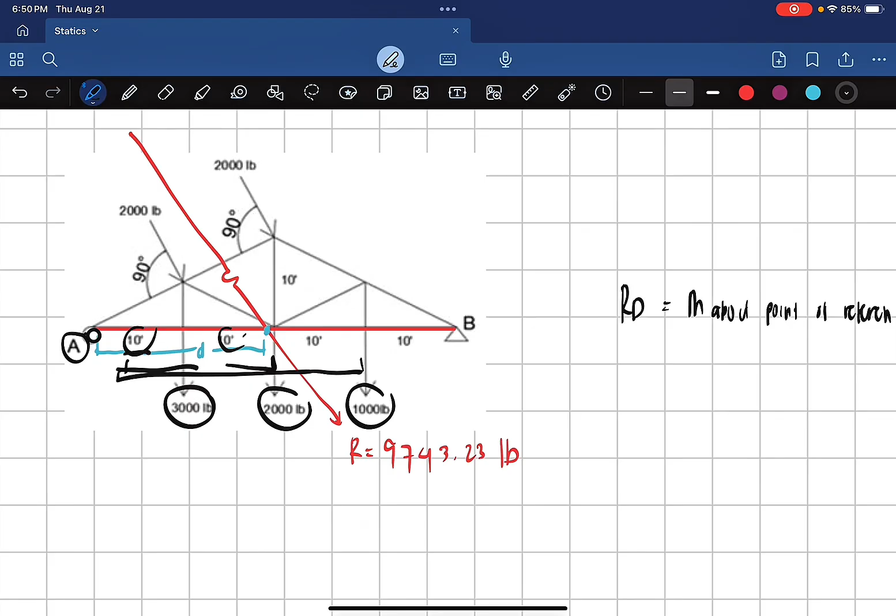So ganun lang, pero kasi meron tayo ditong inclined force. Kung titingnan mo mabuti, since this is perpendicular, ang napoform niyang ganyan is 90 degree angle na. Therefore pwede ko bang sabihin na yung perpendicular distance ng force na yan is eto na. At again, for 2,000 pound, pwede ko bang sabihin na eto na din yung perpendicular distance niya.

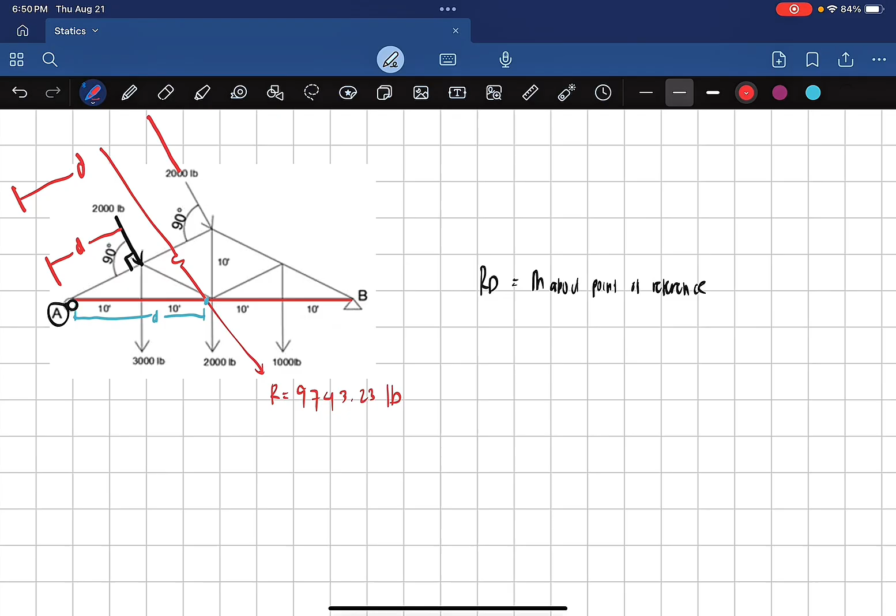Tama? So kung ganun pala, kailangan ko lang malaman yung distance na ito. Since kung mapapansin mo, this is right triangle, and this is also a right triangle. Ibig sabihin pala...

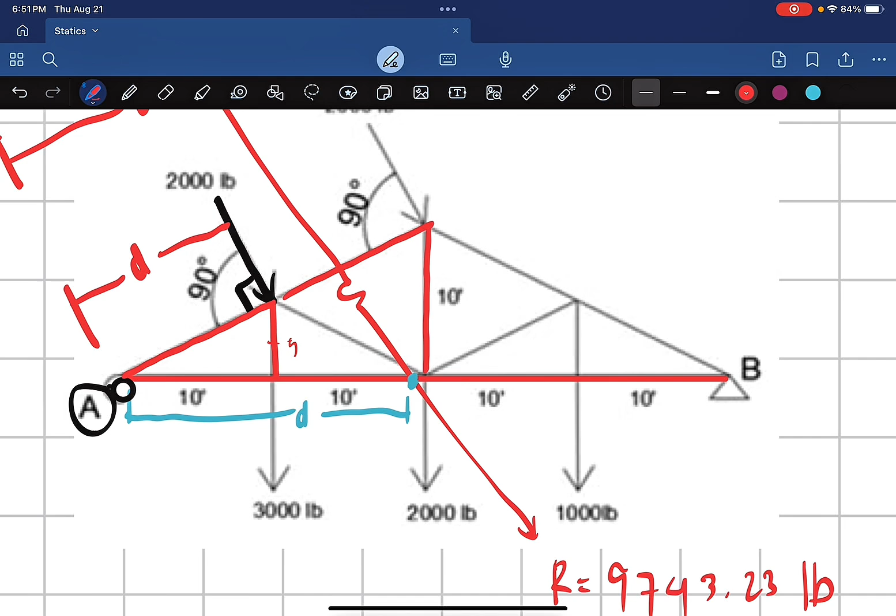By Pythagorean theorem, assuming that this is 5 feet, since 10 feet, kalahati, 5 feet. Assuming that, i-denote natin as D, ito is D prime naman. For D, pwede mo natin sabihin that it is also equal to the square root of A square plus B square, wherein D is equals to square root of 10 square plus 5 square, which is equal to 5 square root of 5 or simply 11.18.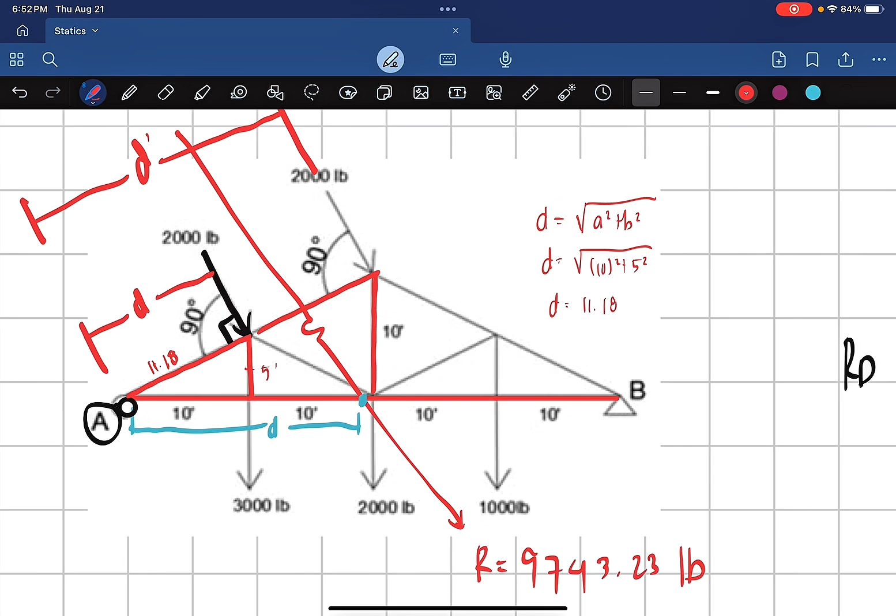Okay, kasi mapapansin mo, by ratio and proportion, guys, sige sulit ko muna. So this is 11.18. By ratio and proportion, nag-increase yung triangle natin, nag-increase siya ng half. Ibig sabihin, pagdating dito, i-multiply lang natin siya ng twice. So 11.18 times 2, this will be 22.36. So sige, para sa mga nagugulumihanan.

So ang D prime natin is also equal to square root of A square plus B square. However, ang A natin dito is itong base na to, which is 20, so 20 square, tapos magiging height natin is eto naman, which is 10. So 20 square plus 10 square. Ang D prime natin, makukuha natin yan na 20 square plus 10 square. Same.

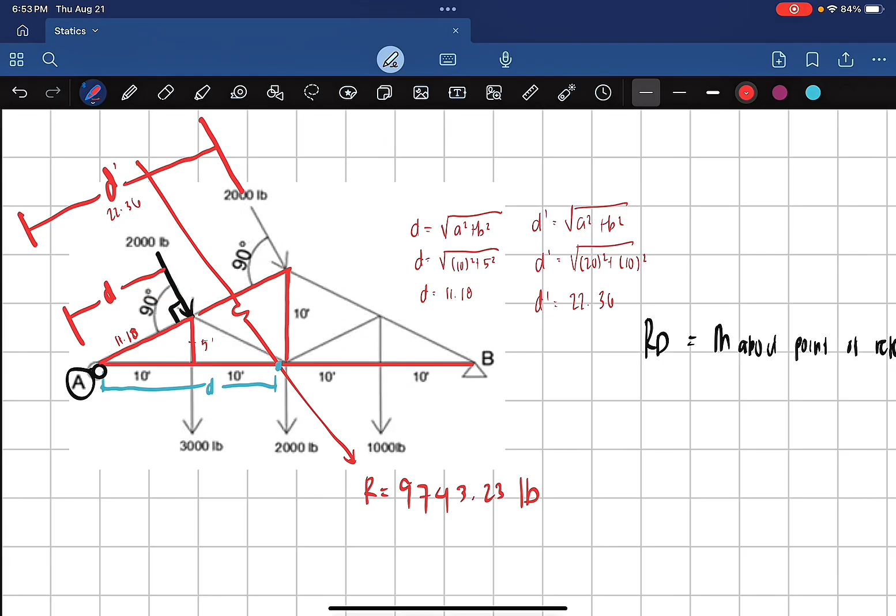22.36, ano ba to? Feet. Okay, so yan, so feet. Now, alam na natin yung perpendicular distance.

So, taking the moment at A, pwede na ba tayo mag-take ng moment sa A? So, pwede na. Moment at A. Okay, considering counterclockwise, clockwise positive na siya.

Considering clockwise positive, okay. The moment at A is equal to 3,000 multiplied by 10, since clockwise to, di ba? Ang 10 na ito is, if we're going to get the moment about point A, ang magiging ikot nito is clockwise, tama? So, positive multiplied by perpendicular distance na 10.

Okay, same goes with the 2,000. So, plus 2,000 multiply by ang perpendicular distance naman niya is etong buo na to. Okay, so kung ganun, pababa pa rin siya, taking moment from here, perpendicular distance dito, iikot naman siya clockwise pa rin. So, yan, plus 2,000 multiplied by 20.

Same goes with the 1,000. So, 1,000 pound, okay, multiplied by, ito may perpendicular distance niya, okay, which is equal to 10 plus 10 plus 10 is equal to 30. And then, iikot siya as well for clockwise pa rin. So, plus 1,000 multiplied by 30.

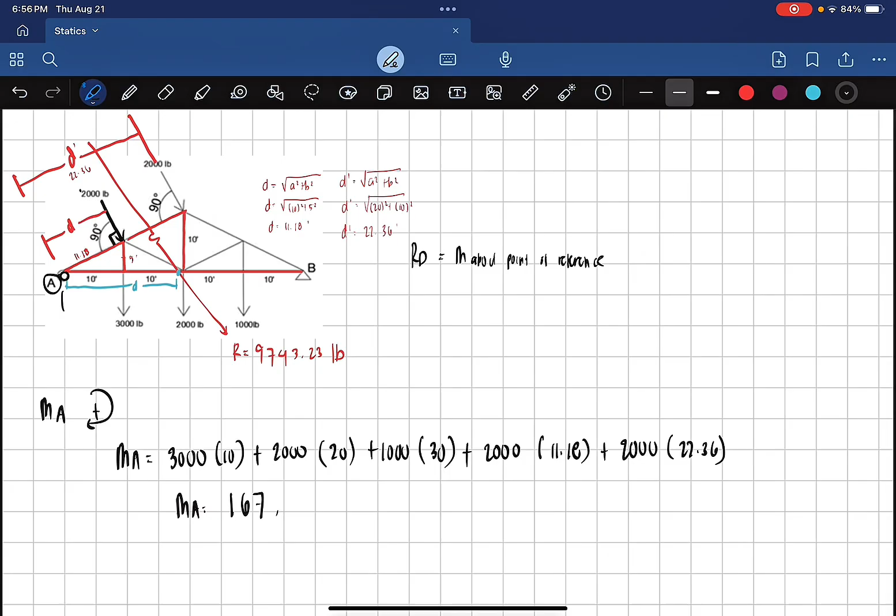3,000 multiplied by 10 plus 2,000 multiplied by 20 plus 1,000 multiplied by 30 plus 2,000 multiplied by 11.18 and 22, sorry, this is 22.36. Ang makukuha natin is equal to 167,080 pound feet, okay?

So guys, kung titingnan niyo mabuti, okay? Sabi ni sir, gagamit tayo ng RD is equals to moment, okay? So ang R natin is equals to 9743.23D, okay?

Is equal to, ang moment natin is 167,080. We'll get, yung D natin is 9743.23D equal to 167,080. Kapag ka nag-shift solve ka dyan, lilitaw dyan is 17.15.

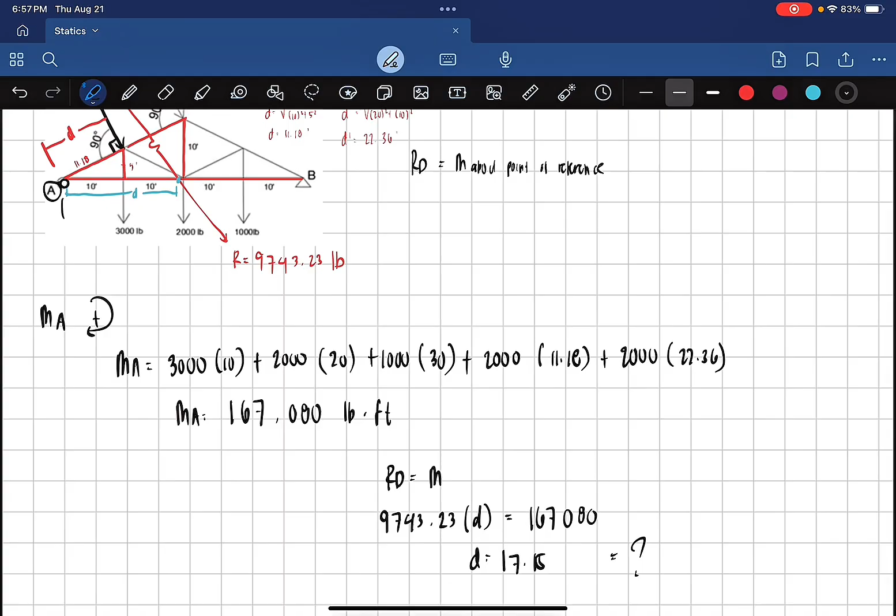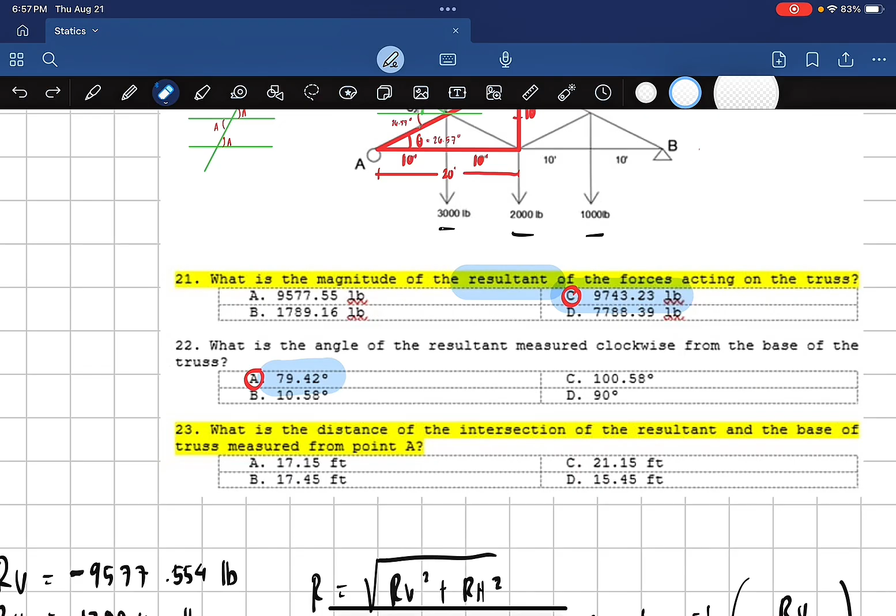However, tama ba ito? Kung titingnan mo mabuti, okay, nasa choices natin yung 17.15. However, kasi, hindi yan yung hinahanap natin. Yung 17.15 na yan is the perpendicular distance or the distance, okay, of the resultant along this point. Okay? Yan yung 17.15 na makukuha natin. So, therefore, mali yan. Okay? Kung may nagsagot at may napalabas to, mali yan.

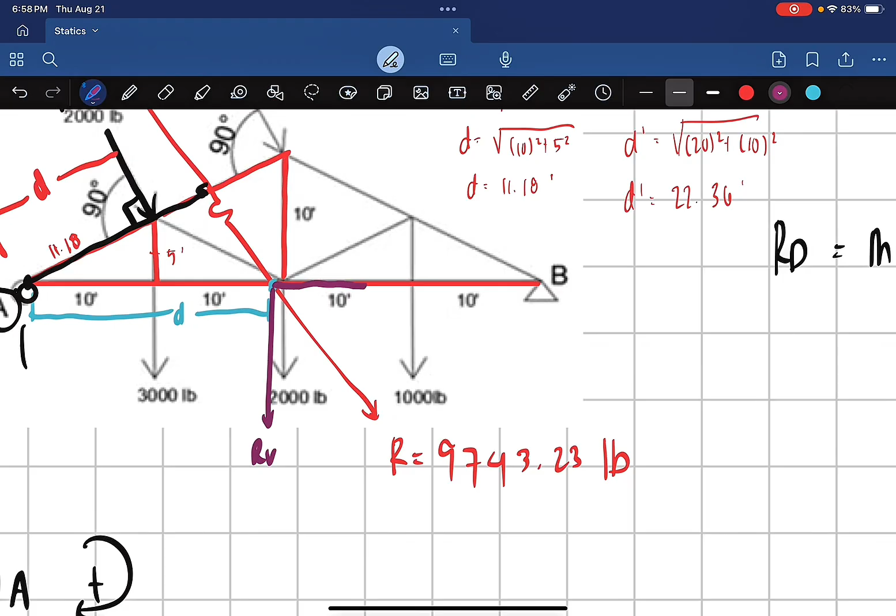Okay? Kung titingnan nyo by principle of transmissibility, ang tendency na to, pwede mo bang i-translate into this one? Okay? This will be your RV and this will be your RH. At this point, di ba equal pa rin yan? This is also yours.

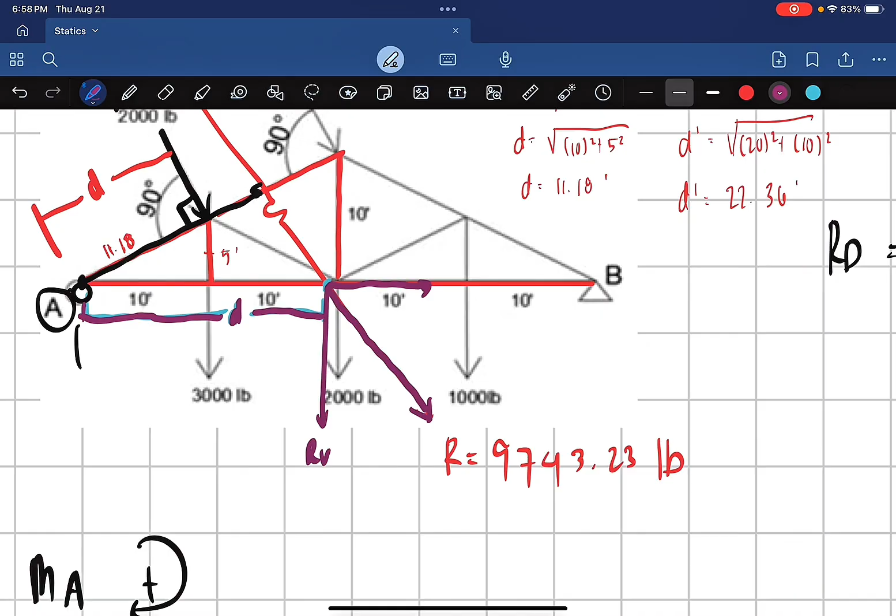9743.23. At since ang hinahanap natin is the distance, okay, of from point A, okay, to the intersection natin, pwede ba natin sabihin that instead of using the resultant, pwede ba natin sabihin that RV D is equals to moment? So, let's try. Ano ba yung magnitude ng RV natin?

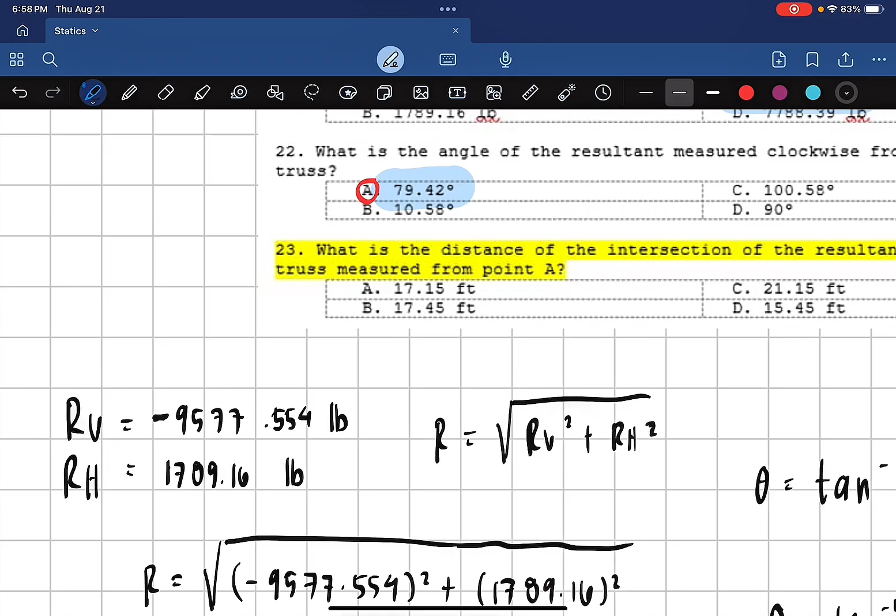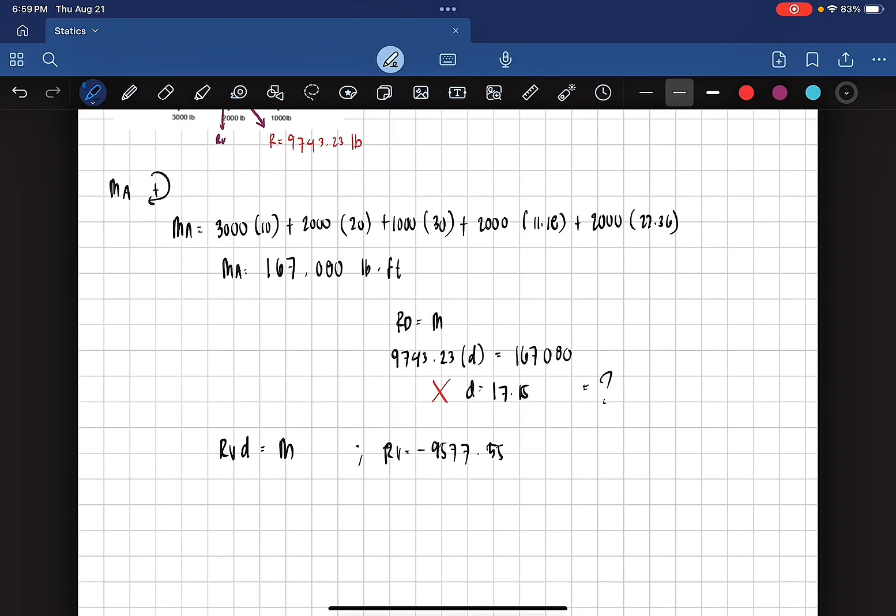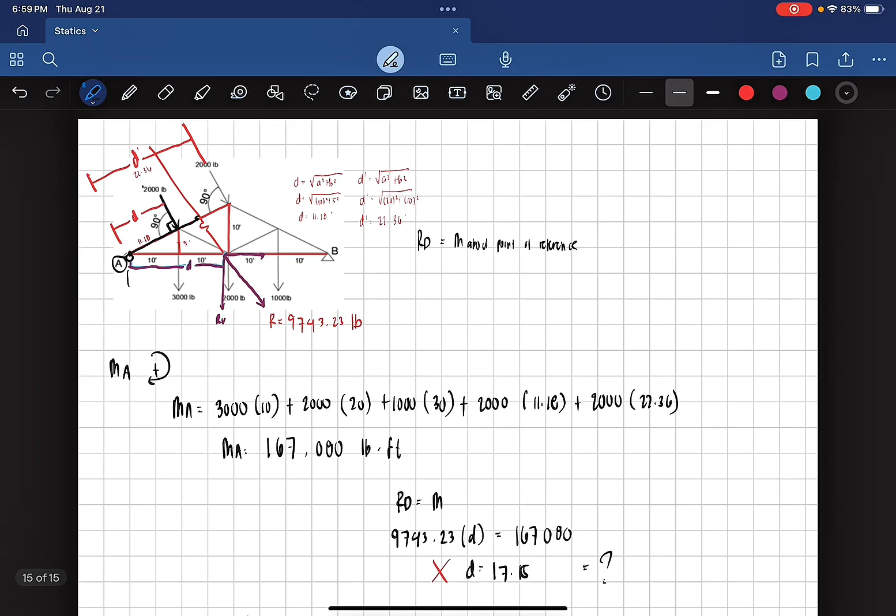By looking at our, ang magnitude ng RV natin is 9577 or negative 9577. So, ang magnitude ng RV natin is RV is equal to negative 9577.554. Okay. Simply, pwede natin siya i-write as 9577.554 downward. Okay? Downward. O, ibig sabihin, ayun nga, na-drawing naman natin that yung RV natin is downward.

So, if we take the moment, okay, pwede ba nating sabihin na 9577.544D is equal to yung moment na nakuha natin, 167,080. So, calculating, we'll get 9577 multiplied by D equals to 167,080. Shift solve, 17.45

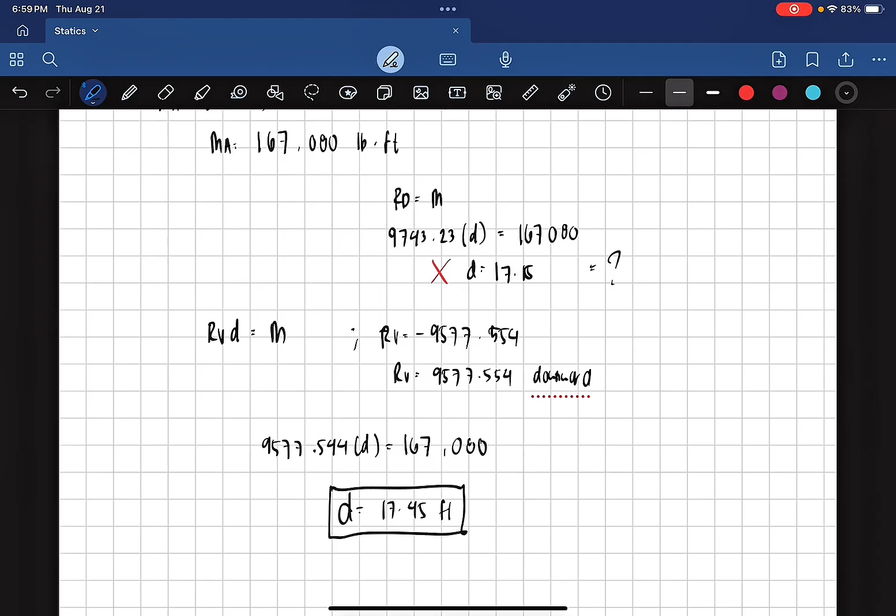feet. So ngayon, ito yung magiging final answer natin. Okay? So highlight natin. So yan nga yung magiging final answer natin. Okay.